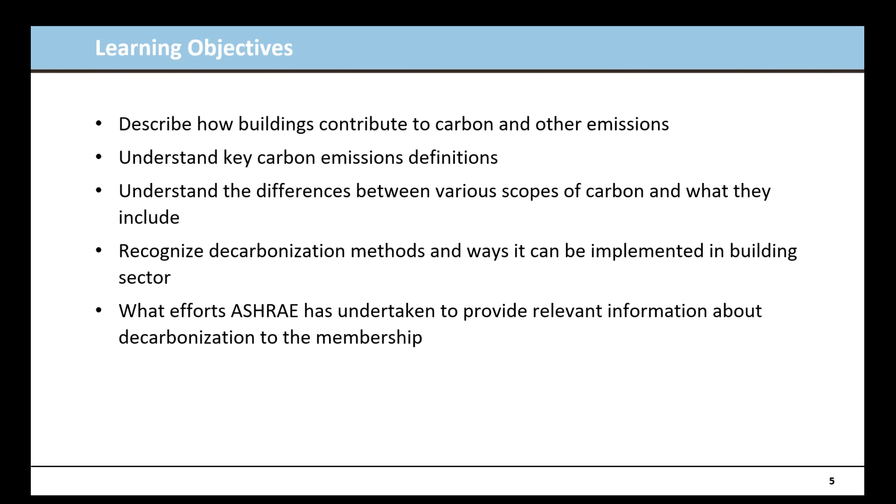So this second one is primarily on what to do specifically in HVAC systems and how we can decarbonize those systems. The third one is how do we apply it more vigorously throughout everything we're doing. I'm going to touch on some of those topics, but not spend a lot of time on them. I will say this is not primarily all my work. I put this together, but I had a lot of help from smart people working on the task force for building decarbonization, and some of these slides are directly from them.

So that's my outline. But I want to give some background starting on this. We're looking at another 2 billion people joining the planet in the next 30 years. And sometime around now to the next couple of weeks, the 8 billionth person alive will join us.

So we already have huge growth in population globally, and that's going to continue. With another 25% growth in the next 30 years, we're going to need buildings. It's estimated that by 2060 we'll need 230 billion square meters, or 2.5 trillion square feet, which is effectively like building New York City every month. That is a huge growth area.

But it's not going to happen in the traditional areas. There's a terminology of the global north and the global south - you see the global north in blue here, and the global south all in red. Most of that growth, both in population and building construction, is in the global south. So that's a large amount going on.

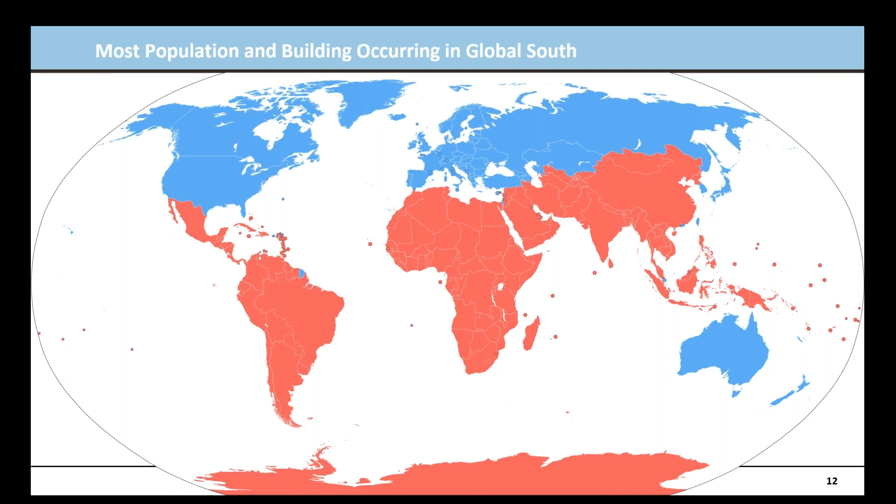A good chunk of it is going to be in Africa, particularly as economies like Nigeria, which is already Africa's largest economy, grow by 50% over the next 30-40 years. So it's a huge transition - not so much in what you may think of as the traditional parts of the world.

On the other hand, we're already seeing huge change in the climate, and that's the reason we're even considering decarbonization. It's the goal we're trying to deal with - from 2015 trying to go from 2 degrees to 1.5 degrees Celsius, but now pushing for 1.5. Unfortunately, I think we're already going above that if you look at some of the data.

I recently did a quick study, just picked 12 cities at random, and we're already seeing about a 0.5 degree change over the last 25 years in our design conditions. That's kind of disturbing, that we're already seeing this before what these models are predicting going forward. I also like to start my talks with why do we even care about buildings.

If you look worldwide, on the left you'll see about 30% of our energy use is for buildings. If you go to the far right, in the US it's even more - 40%, and growing. But if you look at the third and fourth bars, you see the contrast between a very dynamic developing economy in China, where buildings are only about 20%, and Hong Kong, where we're at 65% today. Hong Kong has very little industry related - it's all services, banking, and other business activity.

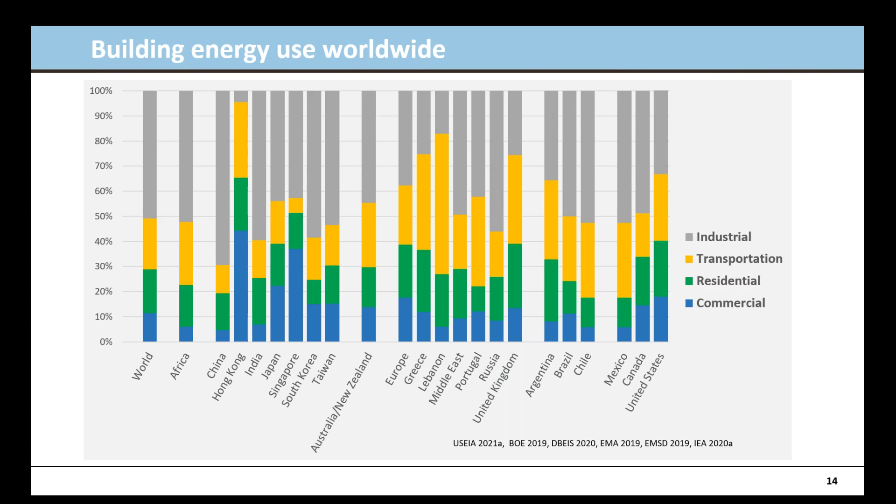So as noted, it's comparatively large, and for a developing economy like China, you're seeing it - it's already at 20%. Well, 15 years ago when I started putting these together, it was at 12%. So for economies that are growing, that global south I showed earlier, there's huge change in what they're doing moving forward. But regardless of that, buildings are a large part of it.

If we look at the US, buildings are practically over 40%, about half commercial, half residential, and industry at 33%, transportation less. Industry, if we went back to the 1960s, would have been not unlike China, well over 50%. Transportation's been growing, but I think we have good quality standards that are really pushing that.

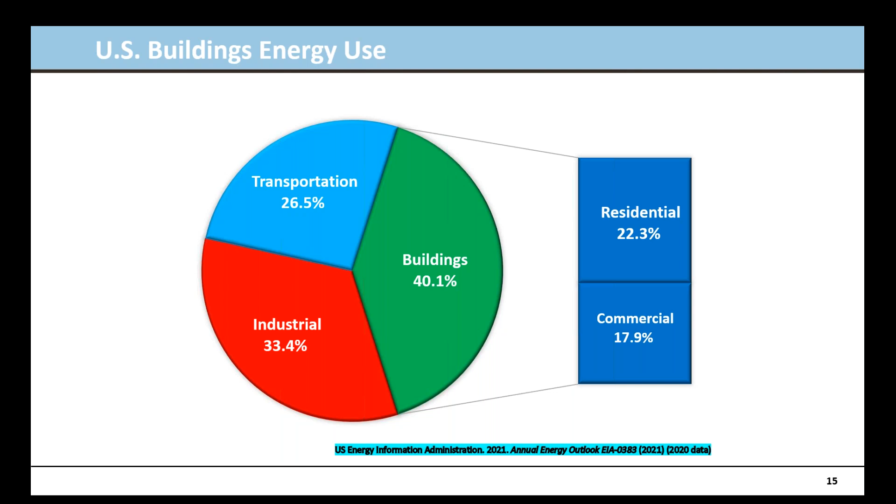Our buildings are changing, partly due to adopted technology. If we look at our houses, the top three uses are heating, water heating, cooling, and refrigeration, plus some appliances—that's not a big deal. But at the bottom we have this category called other uses: small things, lots of technologies that weren't traditionally considered. If I were there live, I'd show you my phone and all the computers and bits and pieces now driving a full quarter of our energy use that weren't there probably 30 years ago. So if we're going to deal with it, we have to deal with the whole spectrum of what's going on in our buildings, not just the top three or four, which is where we've been focusing.

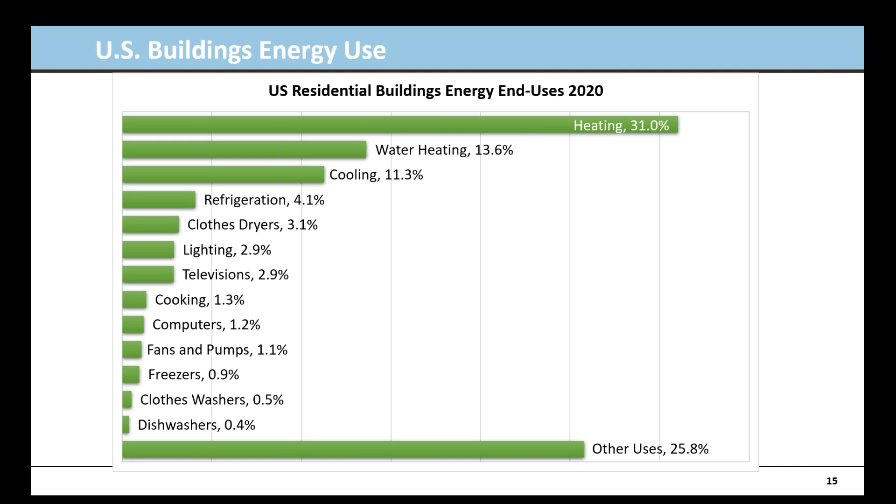In commercial buildings, that other uses category is almost a full third. But of course there's no typical commercial building. If I were a supermarket, the refrigeration category would be over 50%, with cooling and lighting second and third. So depending on the type of building we're in, it varies a lot in what we're seeing. But on the other hand, we have to deal with those other uses and be able to look at that.

So, Drew, examples of other uses—you mentioned your cell phone. Other uses could be, for example, IT infrastructure, right? Yeah, definitely. You've got computing listed—office equipment and computing, which is 13% of the total. But it is the IT infrastructure. I don't have anything about elevators and escalators in here, and in a lot of buildings that's a larger building—that's a big percentage of what's going on.

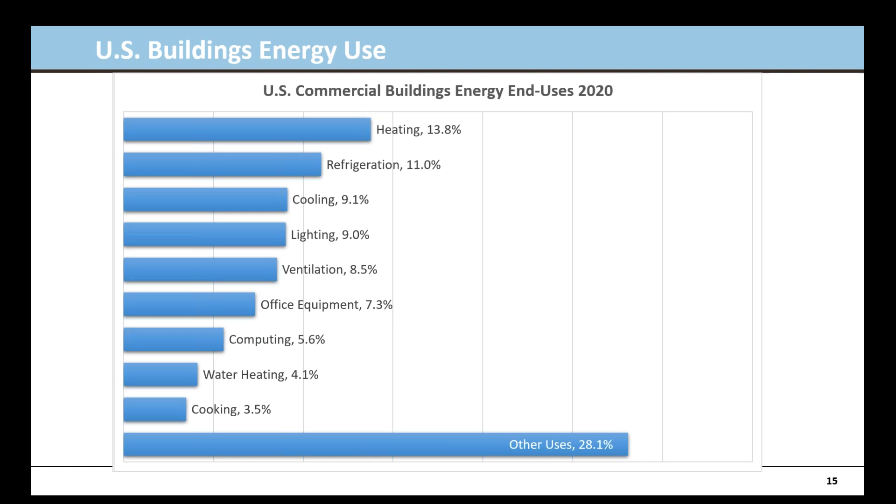If we look globally at where carbon dioxide equivalent emissions come from, buildings are responsible for a full 37%. You see transportation, other industry, and non-building construction industry making up another 10%. If you break that out between residential and non-residential, the indirect amount is related to our electricity, which is one of the biggest drivers of carbon globally. Residential buildings are responsible for 46%, or almost 20% of that total, not unlike the numbers I was just showing, with residential a bit more. But a quarter of that 37% is in construction—the materials we build and the processes we use to get our buildings built today. So it is not an insubstantial amount of energy or carbon emissions here.

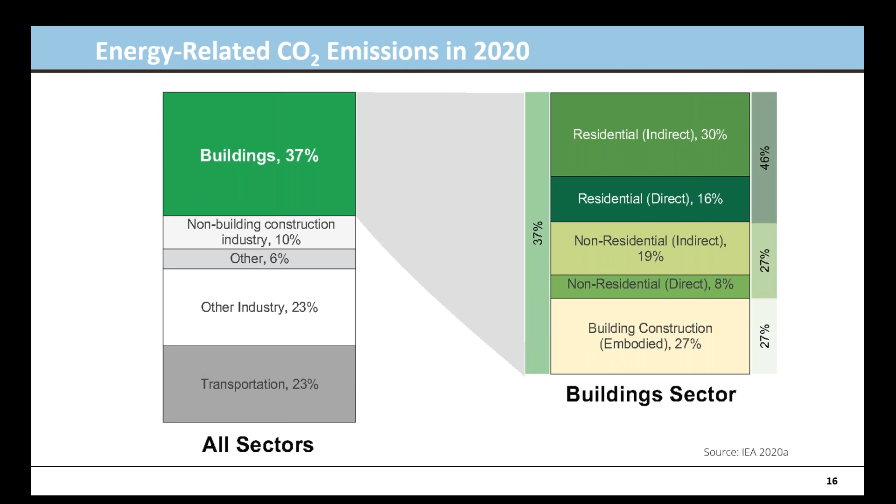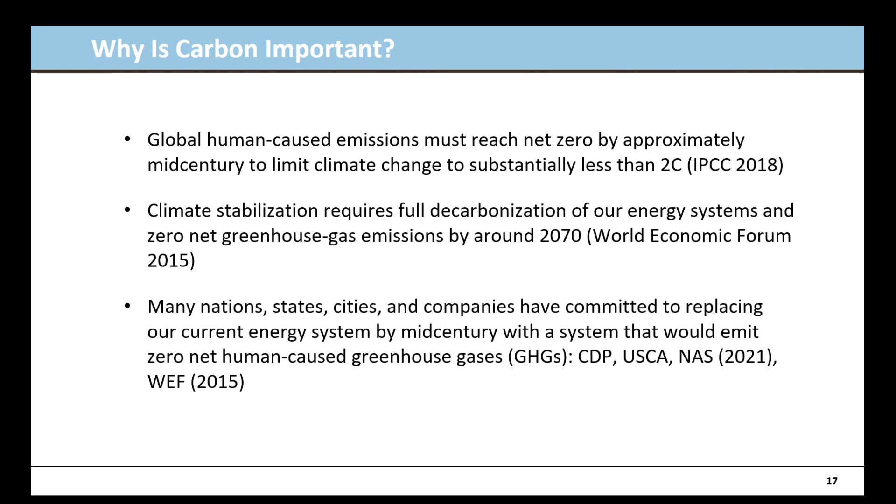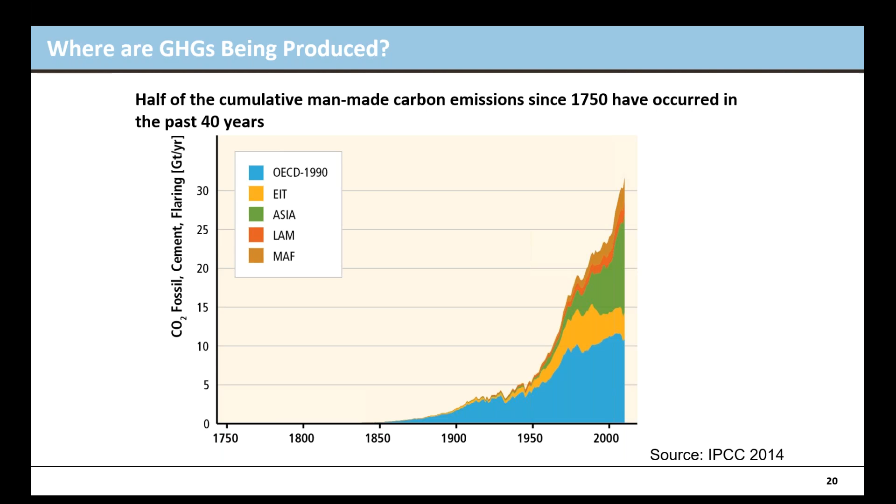So why do we even care? Our human-caused emissions have to go to zero by mid-century, by 2050, if we're going to have any chance of limiting human-caused climate change to two degrees. There's a lot of variability in what's happening, and that means decarbonization of entire systems, including our buildings—a huge amount of work we've got to do. Already, a lot of places are committing to that, not the US particularly, but trying to get to net zero carbon is a huge challenge. Historically, more than half of the cumulative emissions have occurred in the last 40 years, so everything from the 70s on has really driven that forward. The US and other developed countries have been doing it for many years, back into the 1800s or more, but with the growth in transportation and the ubiquity of cars and everything, it's really been driven on since the Second World War.

So why do we want to decarbonize? This is likely, in terms of the building sector, the most formidable challenge we're ever going to see. It's not just individual buildings, it's every building we've got to deal with. We're already at 37% of energy-related carbon emissions, and the building stock is expected to double by 2060—a huge amount of growth at the same time we have population growth. If we're designing buildings today, the decisions we make can lock in an emission level, unfortunately probably high, that will persist for decades unless we're looking at that to really drop it down.

The UN Environment Program estimates that we've got to cut direct carbon emissions by 50% and indirect emissions from power generation by about 60% by 2030. That's only 8 years away, which means we've got to be reducing our emissions by 6% a year over this decade.

And that's equivalent to what happened during the pandemic, when everybody stayed home and our buildings were underoccupied. Not that they were unoccupied, but much big change. Unfortunately, that small bump we had during the pandemic seems to be over, and we're back to where we were before.

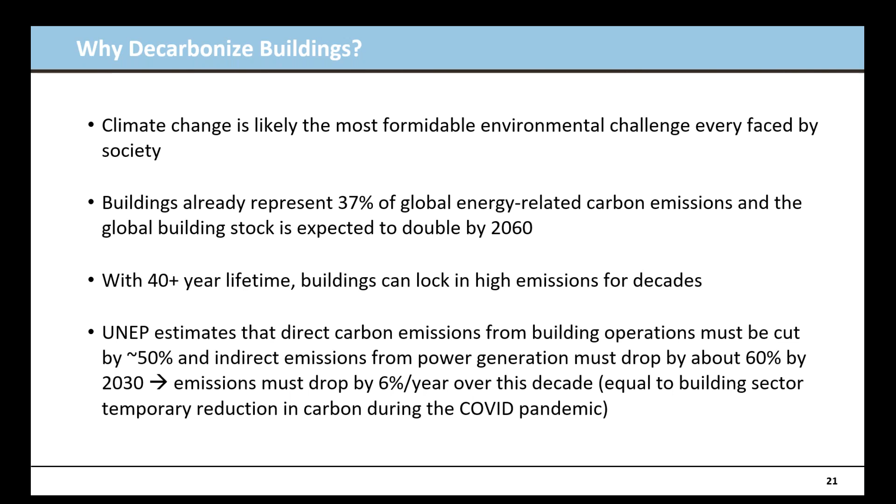But if we look at what each of the countries is committed to, this starts on the left side. You see a couple countries have already achieved that. Uruguay, Finland are going to achieve it in the next few years. Austria, Iceland by 2040, Germany and Sweden by 2045. The bulk of this is everybody saying, oh, we're going to do this by 2050. And that is going to be a challenge for whatever country is dealing with this. Many of them are trying to deal with a big change in the economy.

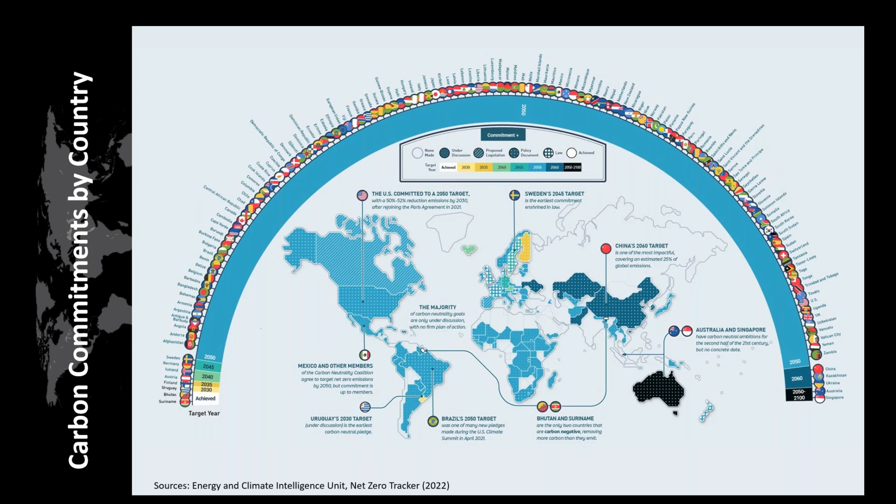And you see gaps in Africa. There's no commitment from a lot of countries that are already big contributors to this. And then you go over to the far right, and we have China and Australia and Singapore that are not even committing to doing the 2050 target. And as we saw, we've got to have that commitment to be able to move forward.

So let's talk about some basic terminology. Carbon dioxide, it is the gas that everybody talks about, but we often talk about it as a carbon dioxide equivalent. The global warming potential of carbon dioxide is 1, so everything else is converted to its global warming potential and then multiplied by that to get to a carbon dioxide equivalent. So global warming potential, again, we're just looking at any other of the greenhouse gases and how their equivalent effect is as compared to carbon dioxide.

Greenhouse gases are the ones that are trapping the heat. They can be natural - it's one of the reasons that we can exist on the planet. We do have a bit of a greenhouse here, but water, carbon dioxide, nitrous oxide, methane, ozone are the primary ones controlling that. And for the most part, we are emitting more carbon dioxide and ozone than would be naturally put in there.

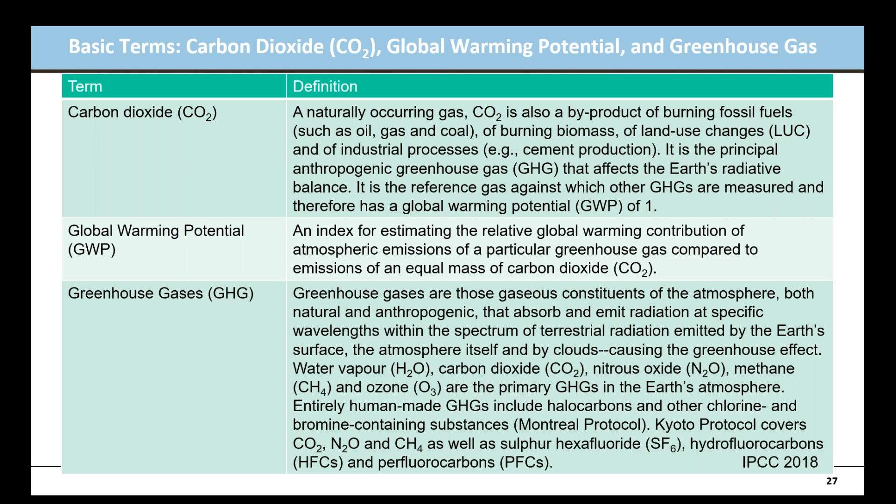But this also includes the halocarbons and other chlorine, bromine substances that are controlled under the Montreal Protocol as well. So a lot of the refrigerants we use are huge contributors to that, which is one reason they were early things that we looked at. So again, equivalent emissions is just multiplying the global warming potential of a particular greenhouse gas over its 100-year lifetime, which for many of them is quite a bit higher.

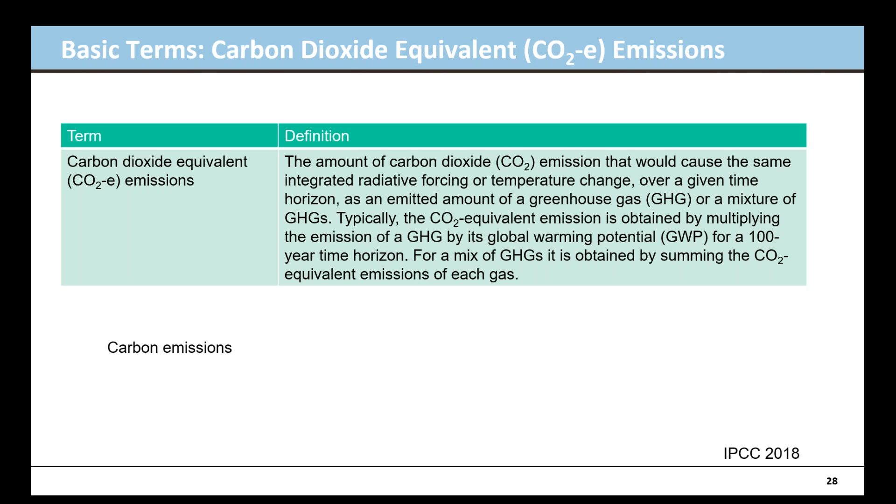And then I think probably the most important is to understand where the carbon is coming from. We have operational carbon, the carbon emissions just from operating our buildings. These may be direct - on-site combustion of fossil fuels - or indirect, which is likely the power supply.

And so the other important part of this, as we are looking to decarbonize the operation of our buildings, the embodied carbon - the embodied energy related to our buildings, the materials, how we construct our buildings - it becomes increasingly important. So that's something we have to do as well, is find materials and systems that are going to be less carbon intensive as we move forward.

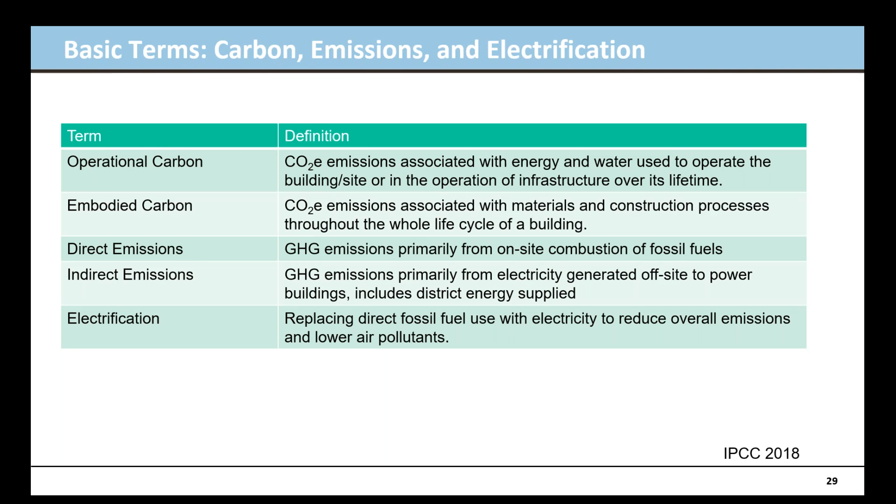Other terminology: life cycle assessment, just looking at impacts of a product, service, or building throughout its life cycle. Environmental product declaration, or EPD - these are independently verified ways of looking at the life cycle information for a particular product. That's a challenge, and as I talk about HVAC systems, unfortunately our industry has very few EPDs for equipment or systems today.

There are other things like carbon capture, utilization, and storage, where we try to capture emissions before they get into the atmosphere. Other site carbon sequestration, and finally building performance standards, which we are beginning to see get traction. Boston, New York, Washington here on the East Coast all have set up standards that require our existing buildings get better over time. So that doesn't mean it's just a one shot energy performance standard. This is over the life of the building, and as we move forward, our buildings have to move to zero. In Boston, that's by the mid 2030s - every building in Boston is supposed to be a net zero carbon building, which is a huge challenge as we're moving forward.

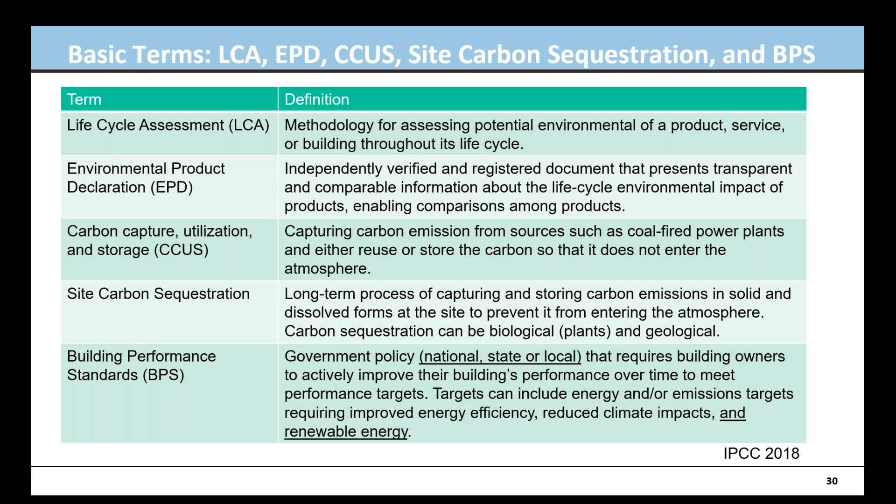So let's talk a little bit about carbon in buildings and how it relates. This is from a European standard talking about all the bits and pieces. The blue is the use stage, but that includes building operation, maintenance, repair, replacement, refurbishment, the operational energy and water related to that. But that's not all that's going on.

There's also the other stages of life, from the product stage, where we're trying to get the materials, transport them, manufacture and bring them to the site, install them, as well as in the end of life stage, how are we deconstructing, demolishing, and how are we reusing materials or waste?

Well, the focus of a lot of this work is in B1 to 7, that use stage, but there's a huge amount of embodied carbon related to that, and we need to take that into account as we're working forward. And if you look down at the bottom, you'll see scope 1 and 2, which is the operational carbon, and that's what a lot of people talk about. But the rest of it is all scope 3. That's the carbon that's already in the product, in the systems that we're designing, that we've installed, that we really need to deal with.

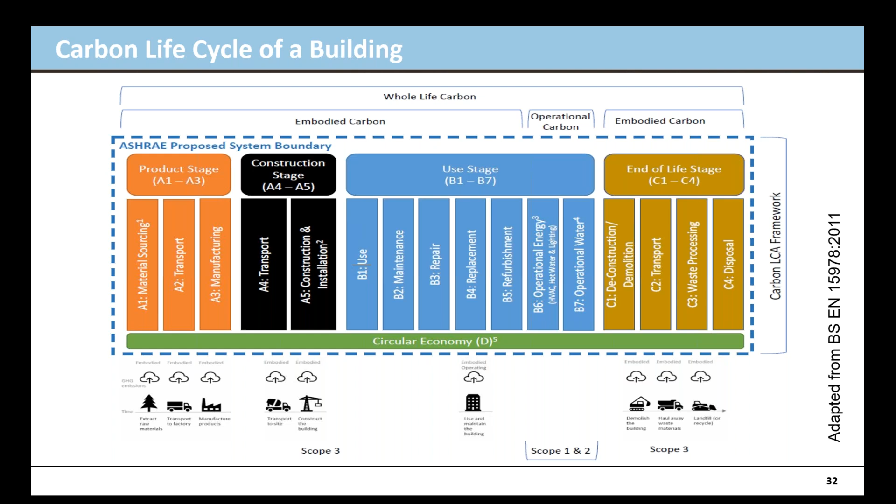So what do we mean by building decarbonization? Essentially, we want to reduce or eliminate the man-made side of carbon emissions related to building, and doing that throughout its life cycle, not just the operational side, but also the construction side.

As far as how people look at it, the 4 pillars for decarbonization begin by reducing the emissions in our materials and systems that we select. Energy efficiency is still very important. Making our buildings as efficient as we can means we're reducing carbon. And then beyond that, using cleaner energy sources, and we'll talk a little bit more about that in a bit.

And then finally, shifting to electricity. With buildings responsible for about 72% of our electricity use in the US, buildings consume most of that power generation. And if it's not clean, we're not moving forward.

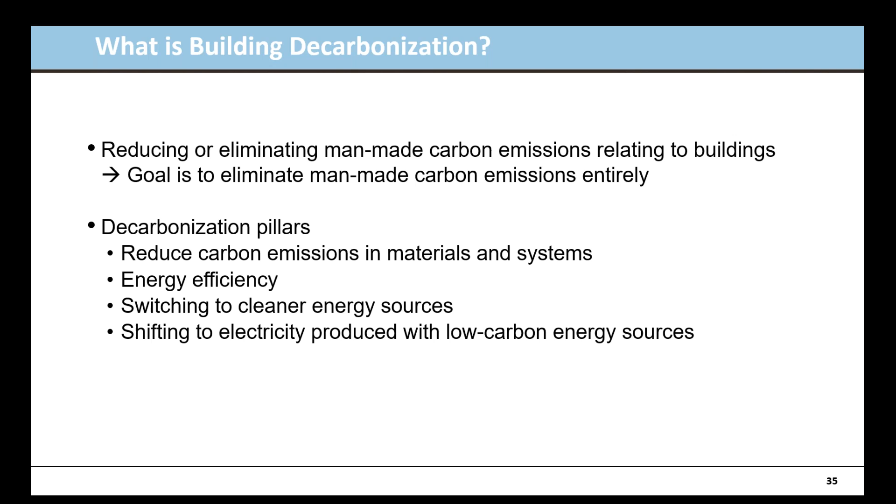Drew, did you say 72%? Just then, yeah, 72% of electricity is used in our buildings. It's incredible. Yeah, there's 30 some percent that's industry, and then a small percentage for transportation, but our buildings use the bulk of electricity. Incredible.

So some of the basics, and this is derived from ASHRAE, which published this past summer a position document on building decarbonization. I'll talk a little bit more about things that position document brings up.

We have to continue providing the environments that people want to be in. They've got to be healthy. They have to enhance productivity and be places that people want to be. We already know that we can design, build, and operate buildings that either minimize or eliminate carbon emissions, and that's possible today. There's a growing number of buildings, unfortunately not a huge percentage yet, that are already operating at zero energy, but pushing that on to zero carbon is kind of the next challenge.

Our HVAC systems have both direct and indirect emissions. The electricity is the indirect side of it, but fossil fuel fired equipment is the direct side. So we have to work on both sides of that.

Energy continues to be the mainstay here, but we also have refrigerants, and our refrigerants, depending on how good the systems are and how well they're maintained, can leak a huge amount, and refrigerants have a global warming potential way higher than that of carbon itself. Again, we have to look at embodied carbon and understand where that's coming from, and understand where the emissions are and where they're occurring, and how we can do that.

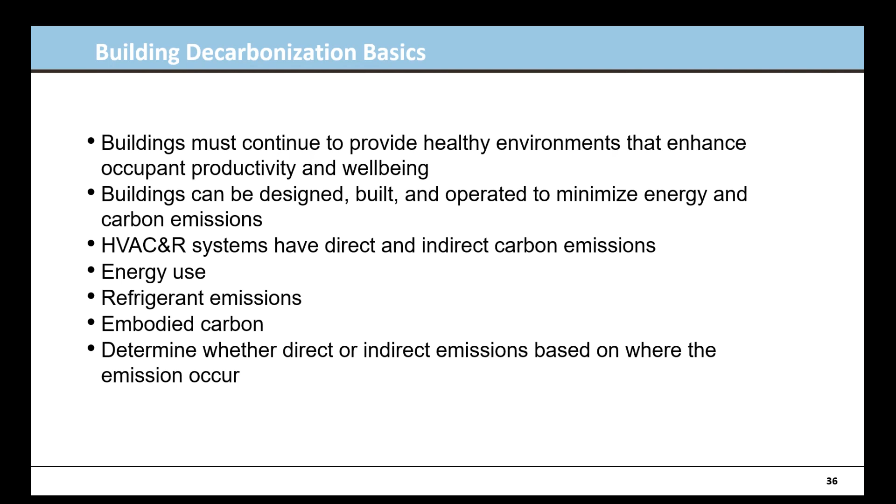The International Energy Agency says that it's possible to decarbonize our buildings. If you start with 2020, by 2030 we're going to see about a 30% growth in new buildings, so a big increase. But if we start looking at mitigating that, we could deal with most of that growth and more, reducing it by half by 2030. But as we move from 2030 to 2050, we're going to see a doubling effectively of carbon emissions in buildings. At the same time, we have the technology today to take that almost to zero by 2050. So there's a lot we can do, but we need to be doing it now.

So Drew, this leads to a question related to energy coming up in the question panel: if we move to electrification, which is the argument you're making for the right reasons, away from fossil fuel to electrification, it sort of makes the implied assumption that electrification will be non-fossil as well. One of the questions is, can renewables meet that challenge? And what about nuclear? Can you speak to those? Yeah, those are great questions.

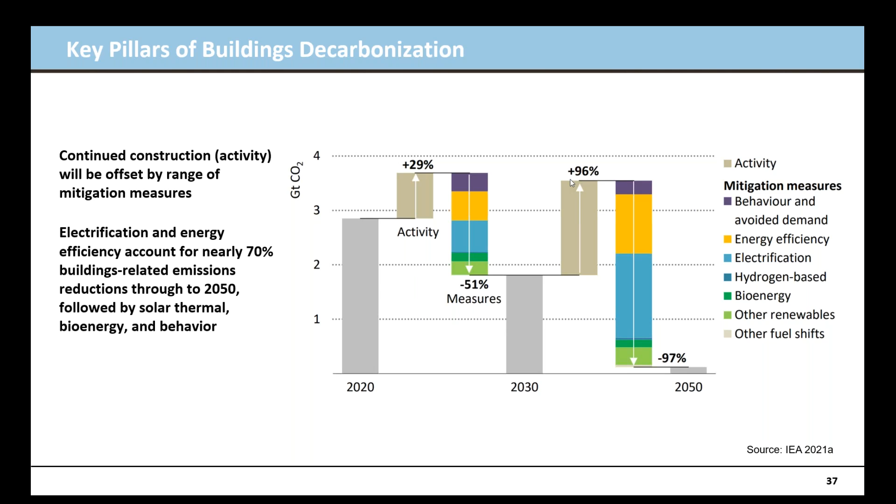So some of the principles here - we talked about pillars - reuse our existing buildings. Try not to waste that carbon we've already captured in our systems and buildings, and keep that on site. Many of the passive things we're talking about also involve making sure our buildings are oriented well, with the geometry done to take advantage of solar potential and whatever opportunities there are.

Minimizing the embodied carbon in new construction materials - a lot of people are pushing for wood products today to be able to do that. But even in wood construction, we have an immense amount of material waste that goes in the dumpster and is basically put in the landfill.

Look at electrifying space and water heating and cooking where possible. Hot water heat pumps are out there - they're a little more expensive, but long term they perform a lot better, with quite a bit higher efficiency. Going with all-electric cooking is also being pushed, particularly induction systems, which seem to be gaining some traction in the market.

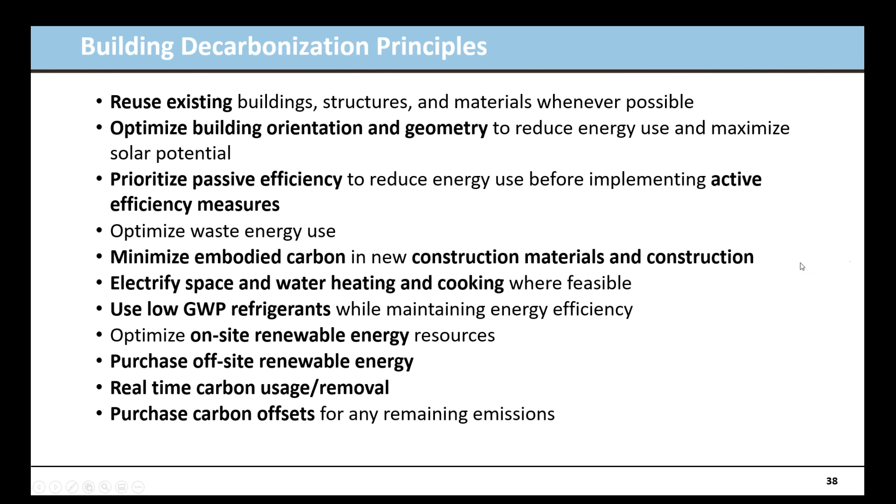Some of the issues related to decarbonization - if it were easy, we would have already done it. Buildings are custom; that's one of the challenges we have. There are a few building types, like franchise restaurants, that have a set footprint, but even those vary somewhat building to building. We build custom on almost every building we do. There's some variation in the housing market too, but for the most part there's not an easy solution that's going to work for every building.

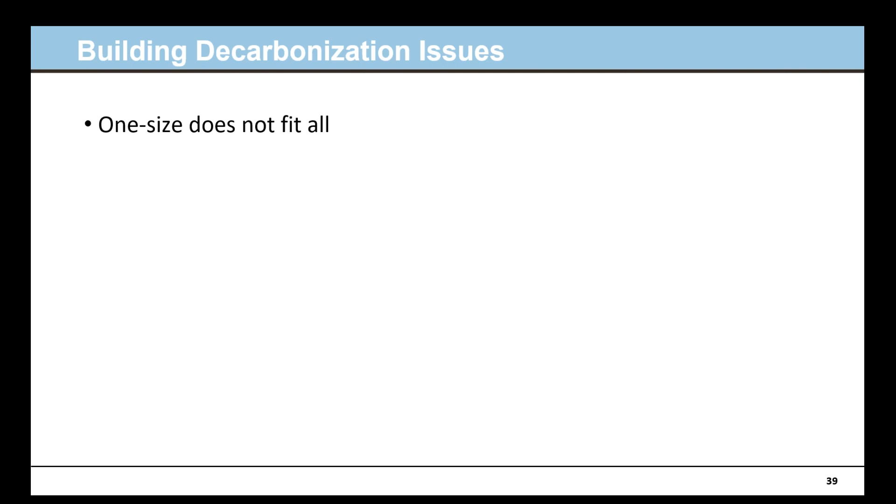We have residential, commercial, and industrial buildings. A lot of the buildings we're going to be dealing with are already here, so we have to deal with that existing building stock. In some places that's only 60%, but here in North America and Europe it's more like 80% that are already here.

We're dealing with the existing generation electric fuel mix. Even if I electrify my building, how clean is that to begin with? And the reality is not many are very clean. Here where I live in Washington D.C., we had one of the dirtiest power plants - it was actually across the river in Virginia, but it was supplying us. They took that offline 15 years ago, and it made our carbon emissions related to electricity drop by half just because of how bad it was. But it's not just buildings getting better - the electric grid's got to get better at the same time.

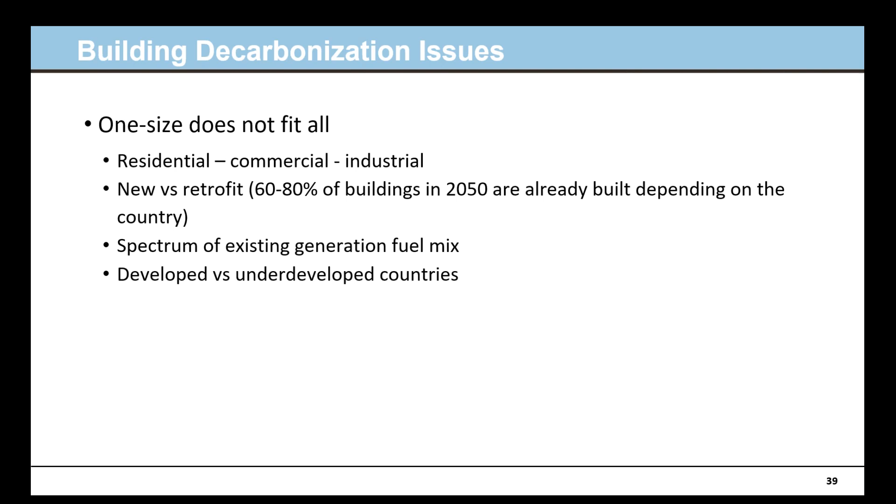Developed versus underdeveloped, we talked about that a bit more earlier. At the same time, we have codes and standards particularly related to buildings, but for many places - you see in the central US - there are not mandatory codes for the state. That's true up into Canada as well. In many respects there are standards for major cities in those particular places. But if you look at South America, Africa, and South Asia, there are many places that don't even have a beginning point for looking at energy efficiency standards.

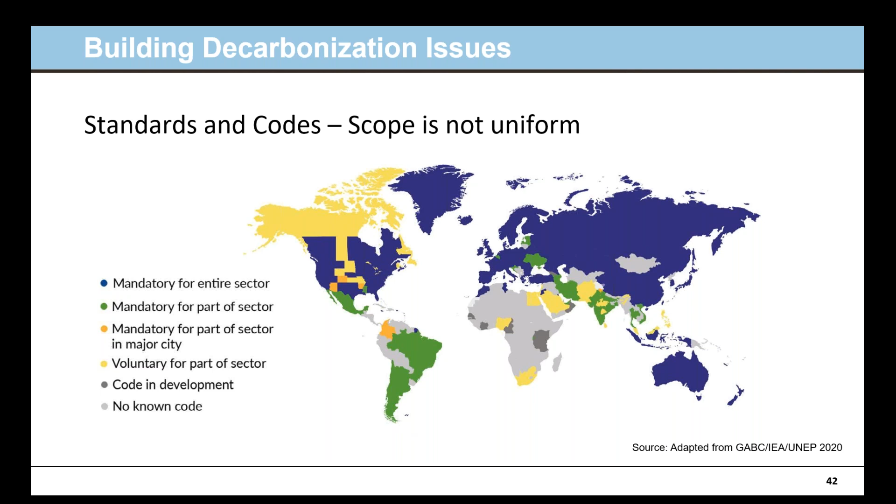Another big issue is what metric are we going to use? For many years ASHRAE has focused on energy use as the metric for dealing with energy efficiency in our 90.1, 90.2 standards for commercial and residential buildings. That's evolving, and there's a push within the society that what we're going to be measuring, accounting for, and pushing toward is carbon, and that's already changing within those standards. But then even looking at carbon, what do we mean by that? Is it average, hourly, historical, forward-looking? Is it based on cost? There are lots of different ways of dealing with that.

And then, can I buy my way out of the problem? Can I buy an offset? In guides from the U.S. Environmental Protection Agency, SBTi, and World Resources Institute, you can do that, but in ASHRAE Standard 228, which is still under development, it's not allowed. So for that standard, it's supposed to be absolute, not trying to buy your way out of it. Do we have a common measurement scale? What are our benchmarks for that? Many of our standards today just include the thermal side of things, and there's a lot in what's called Standard 90.1, for example, on unregulated loads - we don't regulate the amount of power people bring in for plugs or other processes. Those are considered out of the standard, and we need to include that if we're going to truly address this. Embodied carbon and life cycle analysis are big challenges pushed by the green building rating systems we've seen globally - it's an important part of making sure we have it all covered.

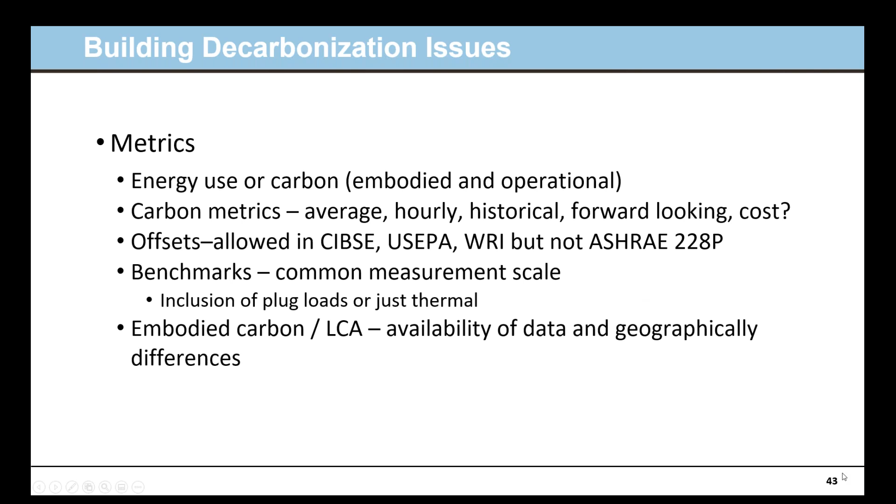or are you talking about refrigeration in the vehicles that are being transported? What does transport refer to? In that case, it's like refrigerated trucks. Yeah, that's what I was thinking. And is that because they fail and leak, could be due to vibration, things like that? Is that what's causing that?

That's a big part of it. It's not like our residential heat pumps that are basically standalone and don't have anything working on the joints and causing it to leak. A mobile refrigeration unit is subject to a lot of stress. Yes, so that makes sense.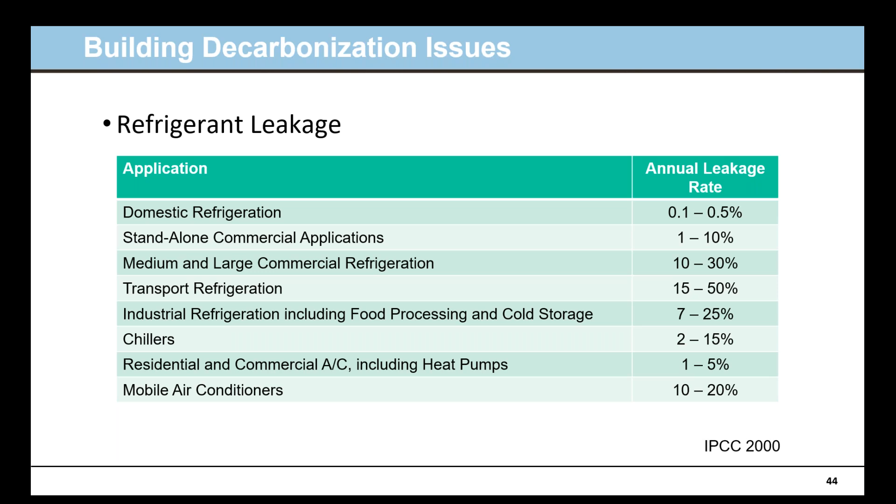Other issues: timing of the energy use. The sources and the emissions are time dependent. It'd be great to say renewables were available 24/7, but they're not - wind doesn't blow all the time, sun's not up all the time. So we are going to have to deal with that second topic, storage. How are we going to be able to manage that? There are large steps forward in that.

One of the states in Australia, their utility has recently brought online, I think it's 250 megawatt battery packs from one of the large car manufacturers. It's been such a success that they're looking to double or triple that amount, because it means they have instantaneous power available when they need it, and they can charge them when they have an excess of power.

Thermal, of course, always a good resource for us, but that tends to still be at a building scale, maybe a small community scale. How do we deal with cold climates? Heat pumps for many years, once you got below about freezing, were effectively an electric resistance heater. That's no longer true - you can see efficiency going down, but there's still some efficiency down toward 17 degrees, though that's for a lot of Northern Europe and North America. We need things that operate much better at temperatures substantially below freezing.

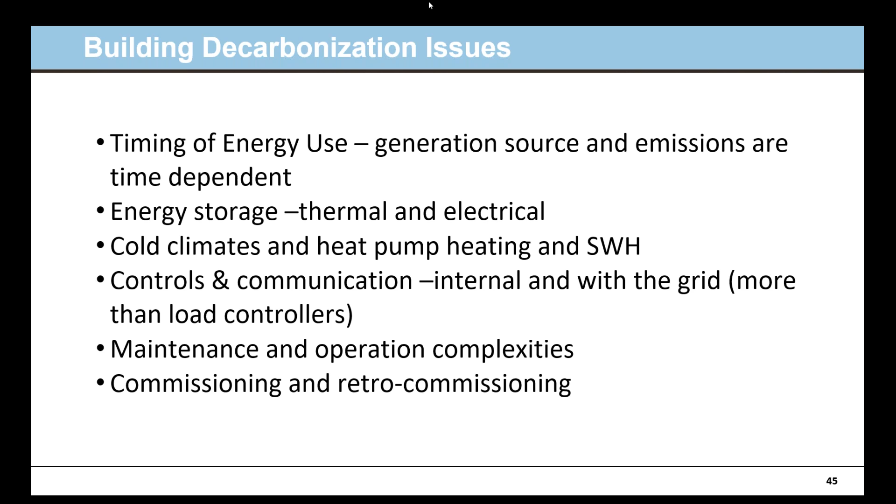Okay, I got to move on, I'm behind. So if we're going to go to net zero emissions by 2050, there are things that we have to do. We have to have standards that are already reflecting that, the building performance standards I've mentioned for Boston, New York, and other places, the tools and the training all have to be part of that. But we have to, at the same time, electrify, and energy efficiency has to be looking at grid-friendly approaches, so we have storage and grid responsiveness, both in our buildings but also at the utility level. And then finally, zero carbon energy, having that available. Our buildings can't go to zero unless the grid is zero as well.

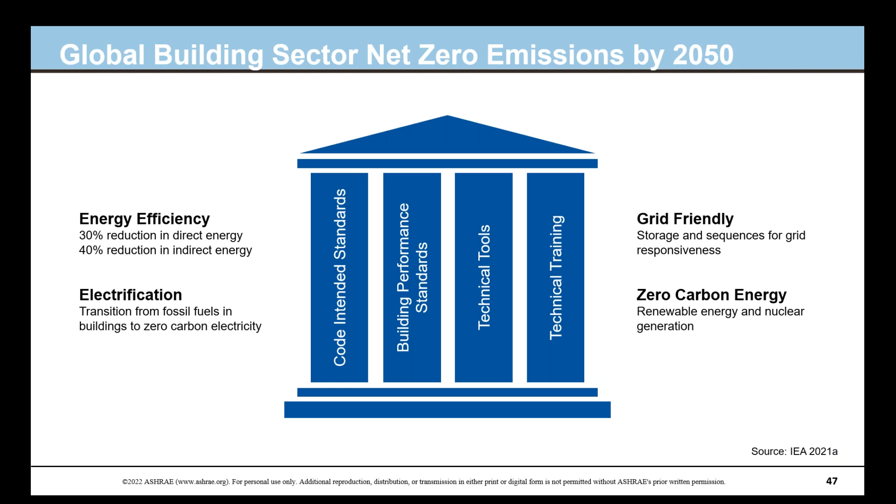So this is the building performance standard in Boston. Over the next year, or the next 30 years, depending on building type, you've got to take your buildings to zero carbon per square foot. So for example, office buildings, by 2034 have to be about 50% better, and by 2044 we're already at 75% better. So by the time we get to 2050, truly zero. And this is part of the regulations now in Boston.

Now these are referring mostly to bigger buildings. A lot of these standards don't go below about 10,000 square feet, just because of the onerousness of dealing with that. So these are dealing with mostly commercial at this point, and with half of our building stock still residential, it's going to be a challenge to move there. It does include multifamily housing, but that's not going to cover all the single family housing that's out there.

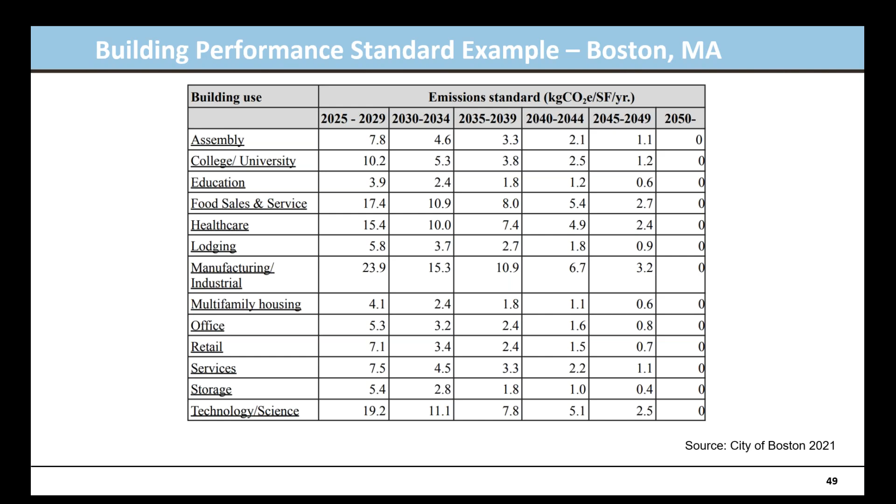If you look at wind and solar power globally, it's about one tenth of the global electricity already, and that's pretty amazing what's happened there. But it's the fourth largest source of electricity beyond coal, gas, and hydro, and growing. Globally, 80% of new electricity plants that went in are renewable. So that's a huge change there. But if you look at the U.S., it's about 13%, which is a big increase.

Less so in Canada, Mexico, Nicaragua doing better than the U.S. for grid solar. If we look at South America, 13% for Brazil, 21% for Chile. Brazil has always seen themselves as very much a green power because their baseline is a lot of hydro, but anything new they've been building these days has had to be fossil fuel generated. We look at Africa, not much penetration there. Kenya is doing well at 17%, and Morocco, Mauritania up over 10%, but huge parts of the continent, you look at Nigeria, they're only 0.1%, and that's the largest economy in Africa still, and is expected to continue to be.

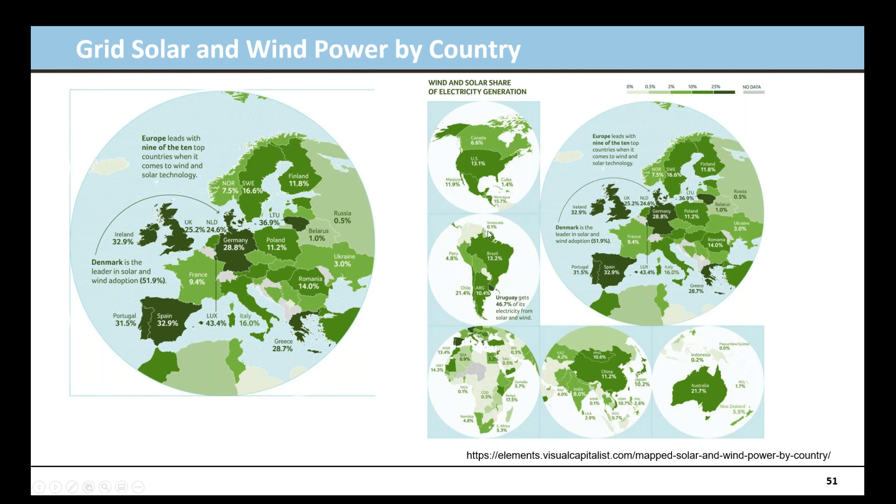Europe is doing quite well: UK at 25%, Germany at 28%, Denmark at 51%. Occasionally you'll see a news item that the UK ran completely on solar today, or Germany was 100% renewables for a day. That's beginning to happen, but it doesn't happen all year yet, and that's a challenge. But we are seeing big opportunities there.

There are ways to get rid of the carbon once we've emitted it. We can try to restore it back into the ocean - actually the ocean is one of the largest places where carbon dioxide gets dissolved into seawater and precipitates out. We can try to put it back into mines, or even capture it at the power station itself rather than letting it get emitted.

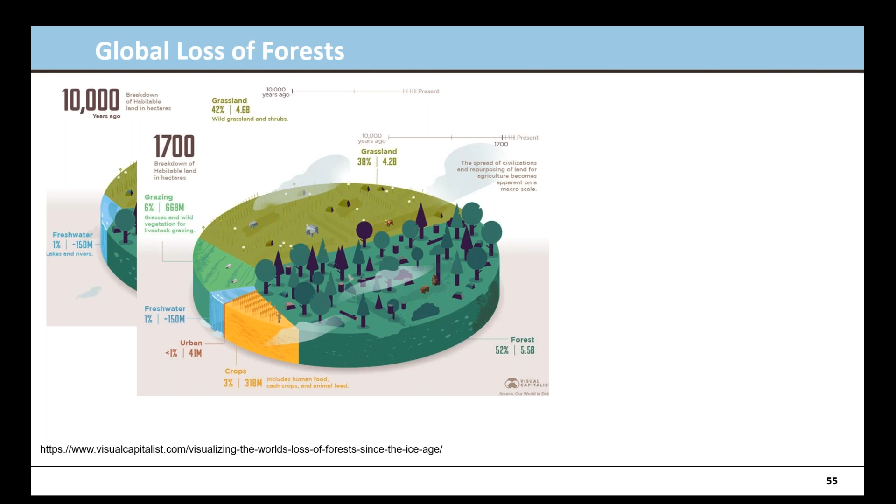One of the biggest sources of carbon storage is forests. 10,000 years ago, about 57% of land area was forest. By 1700, that had dropped to 52%, with crops, grassland, and some urbanization coming in. By the 1950s, that 52% had dropped to 44%, and the grazing area had grown from 6% to 31%. So now for food production and crops, almost half our land area is covered.

By 2018, we're now looking at truly 50% for grazing and crops, and the forest has dropped to 38%. As a resource for storing carbon, that's really an important part of what we're able to do.

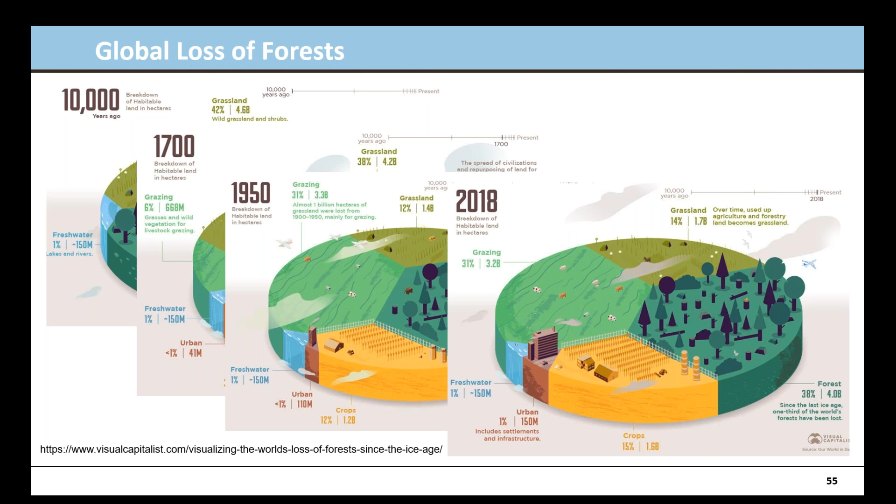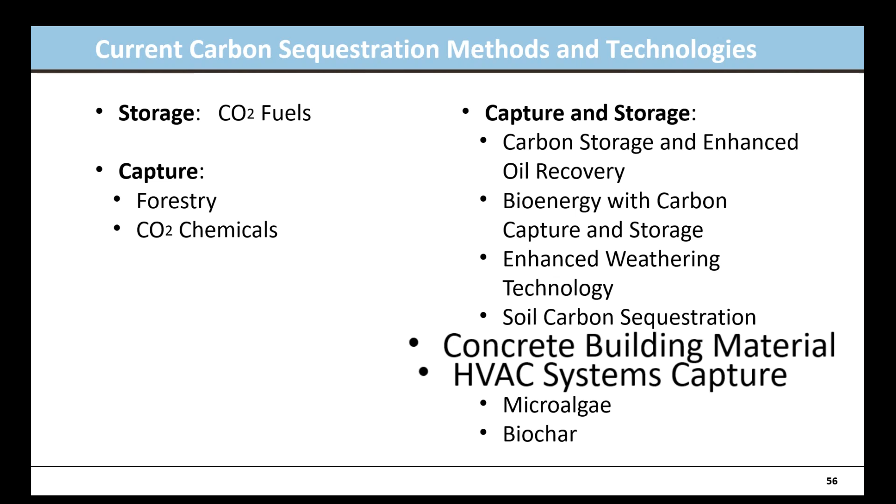There are different ways of dealing with sequestration: we can store it, use CO2 as a fuel, capture it through reforestation, or use it in other chemicals. For buildings, it really comes down to whether we can do something with our concrete and our HVAC systems, because concrete is one of the more energy and carbon intensive materials we use in buildings.

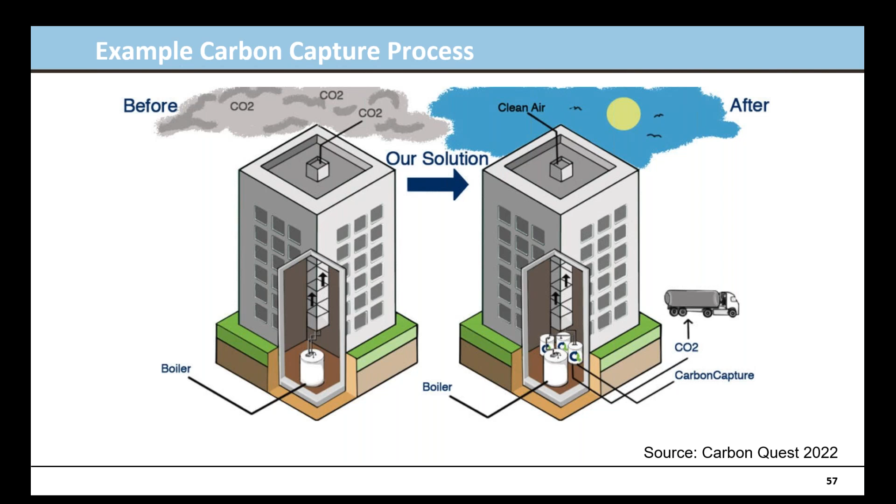I mentioned whole building life cycle analysis earlier - it's really just a way of quantifying the environmental impacts of buildings and processes. It's the best way to look at any carbon emissions for any building project.

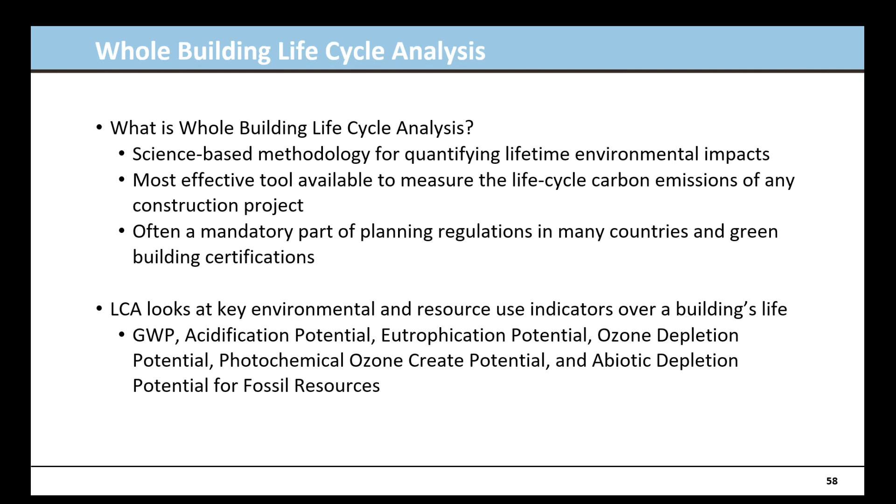We're already seeing LCA show up as an opportunity in many green building rating systems, used as an alternate to the accounting many projects do today to get points. It looks specifically at global warming potential, acidification, eutrophication, ozone depletion, photochemical ozone creation, abiotic depletion, and fossil resources - the whole spectrum of environmental impact, quantified for the building.

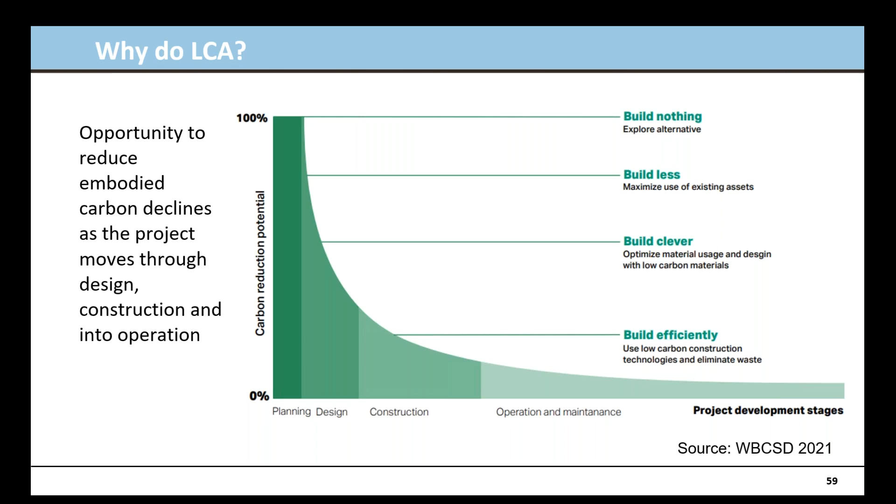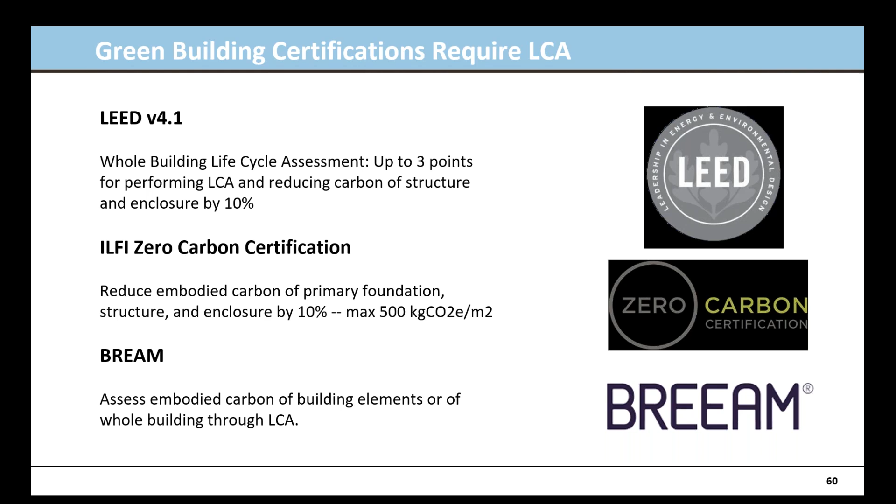LEED gives you up to 3 points for doing an LCA and reducing the carbon of the structure and enclosure. Living Building Challenge and ILFI zero carbon certification have a similar approach, reducing the embodied carbon of the key structural parts of the building. BREEAM has very similar provisions.

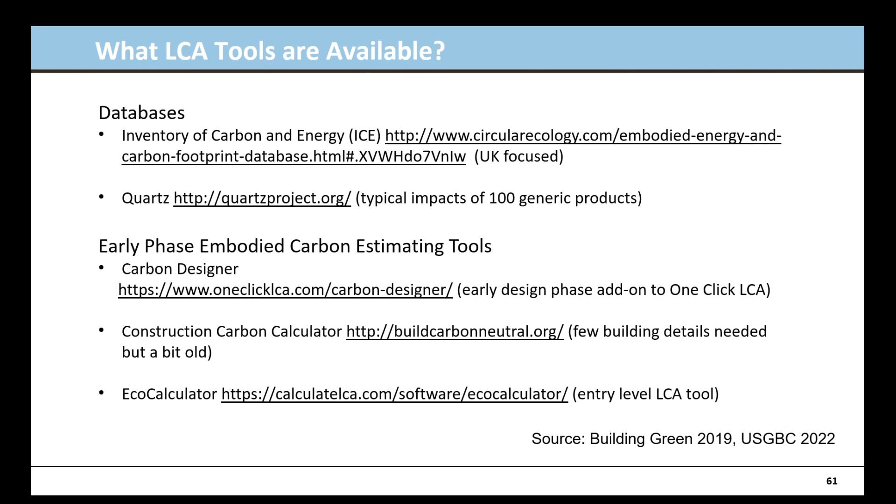There are tools available. There's the ICE, which is UK, and Quartz, which has got 100 generic products, so they're not going to be very specific to a company. Carbon Designer is one of the early design tools you can use, and a product called One Click LCA, which I'm seeing embedded or linked to in a lot of the BIM tools today. Construction Carbon Calculator is kind of generic, so you give some information and it'll give you decent - I'll say decent, not detailed - results. Eco Calculator is another early tool like that.

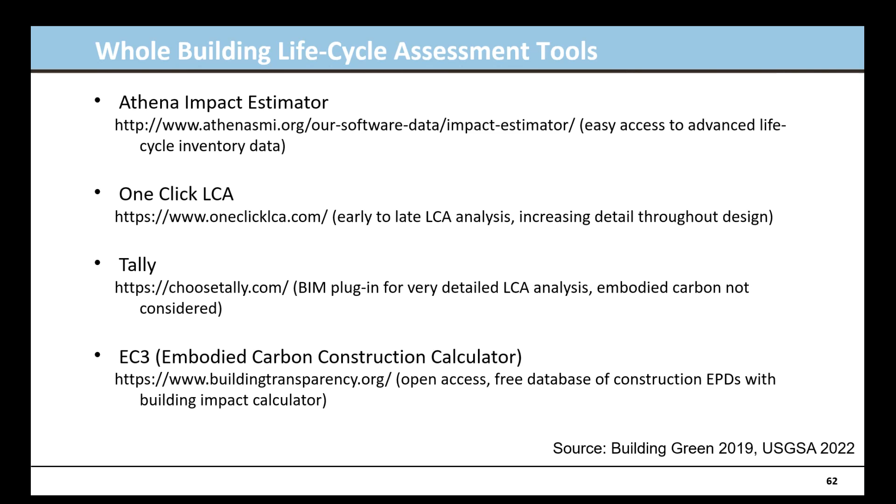Other tools: Athena Impact Estimator - Athena being a group out of Canada - has been developing life cycle inventory data for Canada and the US. One Click LCA, which I mentioned, has the ability to increase detail to look at. Tally is another BIM tool, and the embodied carbon construction calculator as well. That's interesting because it gives you access to construction EPDs, which we mentioned briefly.

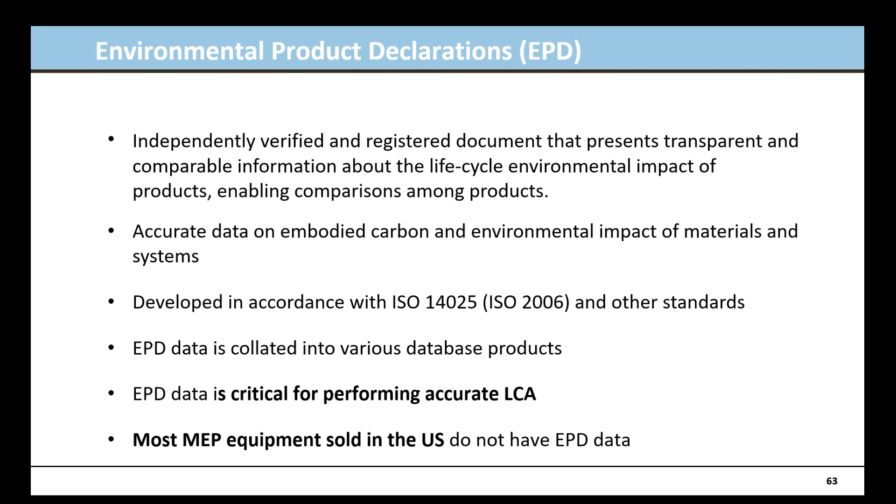Talking about EPDs, this is kind of an easy way - if I know what the impacts are of a particular material or product and have a verified way of looking at that, I can definitely get more, and put these LCAs together better. But there are standards related to that. These databases are trying to pull all that information together, but unfortunately, most of the equipment we put in our buildings, our MEP equipment, doesn't have an EPD. There's not the data available. There are many sources for the materials, so it's difficult to get some of that information.

Let's see, yeah, I'm running long. Sorry, guys. It's okay, Drew - you don't have a flight to catch, so it's all right. No, I don't, but other people may need to go to work.

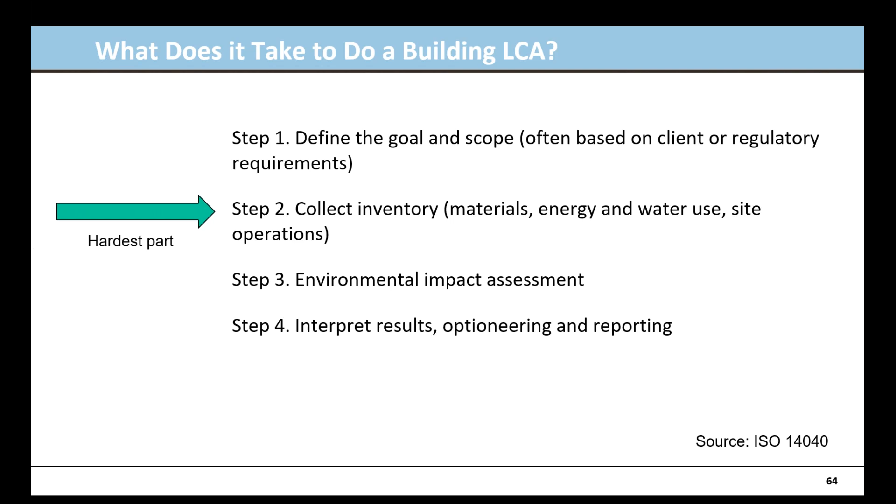I understand. But to do LCA, we need to know what we're trying to do: collect the inventory of information, do the assessment, interpret the results. Unfortunately, collecting the information is the hardest part, and where we have missing data today. So that still is a challenge.

From the building side, we're looking at fossil fuel powered equipment that we're putting in today, and what can we do: lower GWP refrigerants, green fuels including hydrogen as a possibility, renewable gas, methane recovery, biofuels, cooking oil. Those still do emit, but they're not adding to the problem that was already there. Heat pumps - and unfortunately what you're hearing, the mantra for a lot of the industry right now is heat pumps, heat pumps, heat pumps. I think heat pumps are an important part of it, but there are other things we can do there.

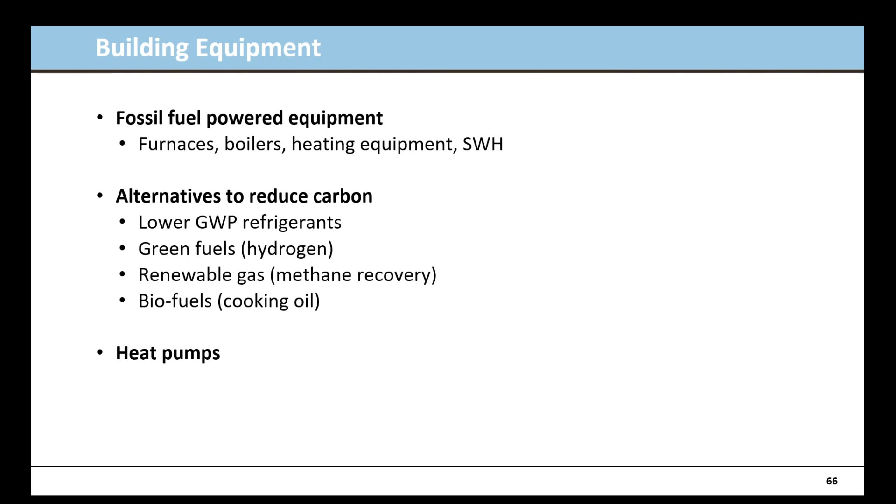As far as lower GWP refrigerants, we see the global warming potential from R410A is 2,088 times the amount of GWP as carbon dioxide. If we move away from those toward lower global warming potentials, you see the HFOs and R514A - we're also seeing kind of a safety issue.

The traditional refrigerants we've been using have been pretty safe - you don't have to worry about flammability or other things. As we move towards some of these others, the B1 category can definitely be dangerous, and the exposure limits are much lower. So if we have a leak, it can be dangerous for people to be in the space.

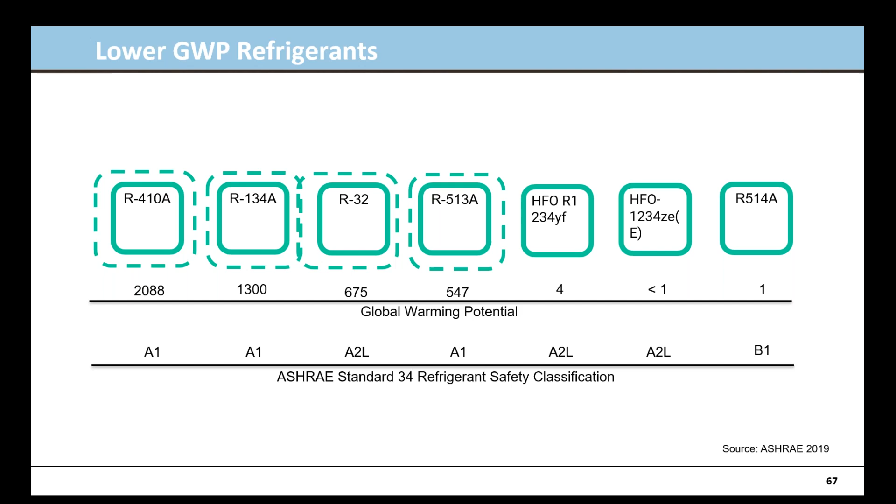I feel silly talking about heat pumps to an ASHRAE audience, but there are a lot of different types. We probably think of heat pumps as the traditional one in our homes, but there are different sources: air, water, ground, solar, or even industrial scale. Today we're seeing everything from residential appliances to industrial scale heat pumps. That technology is pretty straightforward - it can be easily done.

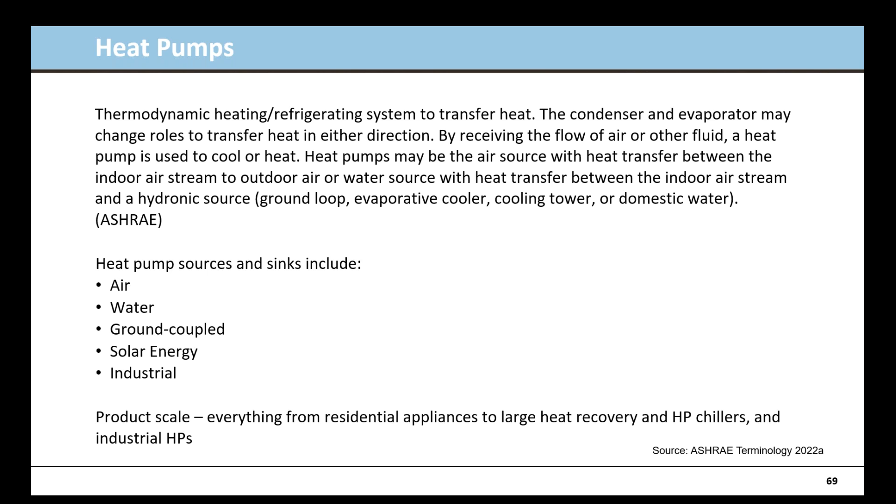So the traditional kind we see in our buildings today, but also things like a heat pump water heater - instead of electric resistance, we can get an efficiency 2, 3, 4 times what we could with electric resistance. And one that my wife and I are about to try is a heat pump dryer, which effectively has no vent, so it's ventless. You don't have to worry about hot air or hot moist air coming out - what comes out is just water that goes down the drain. They're just using the heat pump to dry out the clothes.

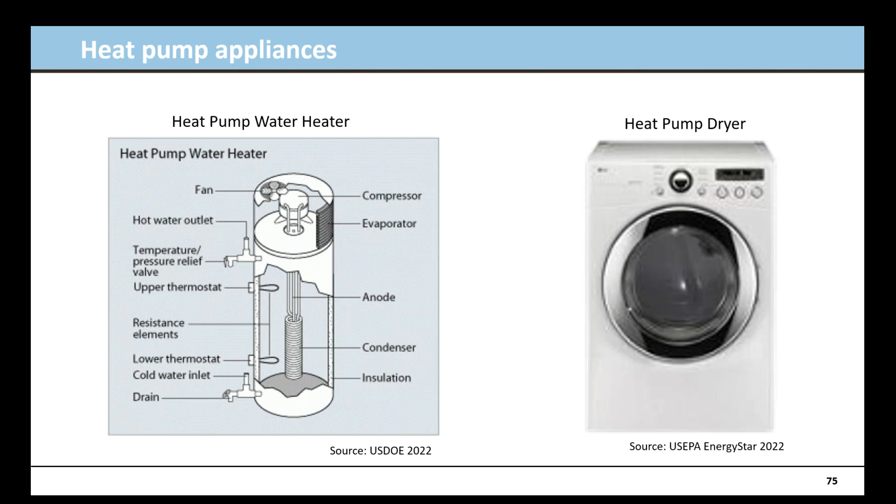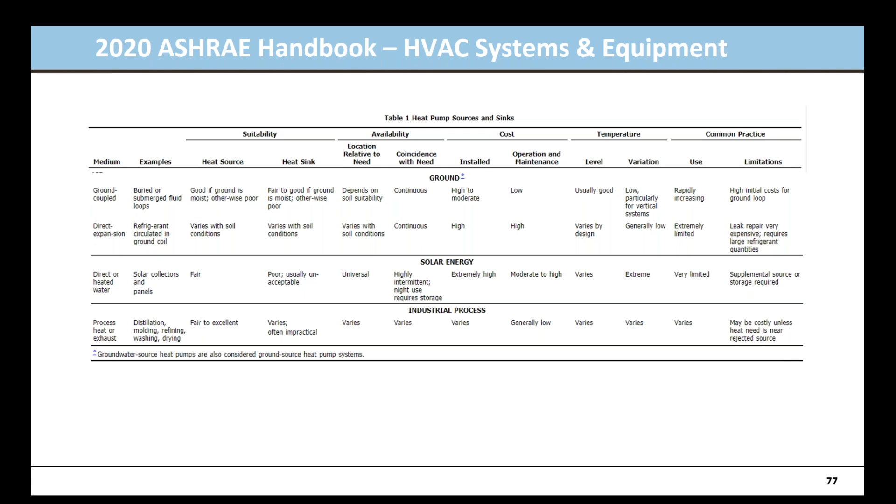The 2020 handbook has a great comparison of the different HVAC systems, particularly the heat pumps, and their sources, heat sinks, costs, temperature, and where they're typically used. So it's a great table here related to that.

As the grid is transitioning to renewables and clean fuels - we talked about renewables earlier, but we're essentially talking utility scale.

I worked 30 years ago at an electric utility in California, and even at that point, wind and solar were the cheapest new generation capability they had. Today, the price is a tenth of what it was. So for them, it's kind of a win-win, because they're getting cheaper installation, but at the same time they have to deal with storage, and how are we going to deal with time of use versus availability.

Lots of people have been dealing with that for many years - pumped hydroelectric and other systems there. Renewable hydrogen, hydrogen-infused natural gas, biogases - trying to recover some of those and use them before they're offset. Methane's a very potent greenhouse gas, so if we can capture it and use it before it gets into the atmosphere, we're better off.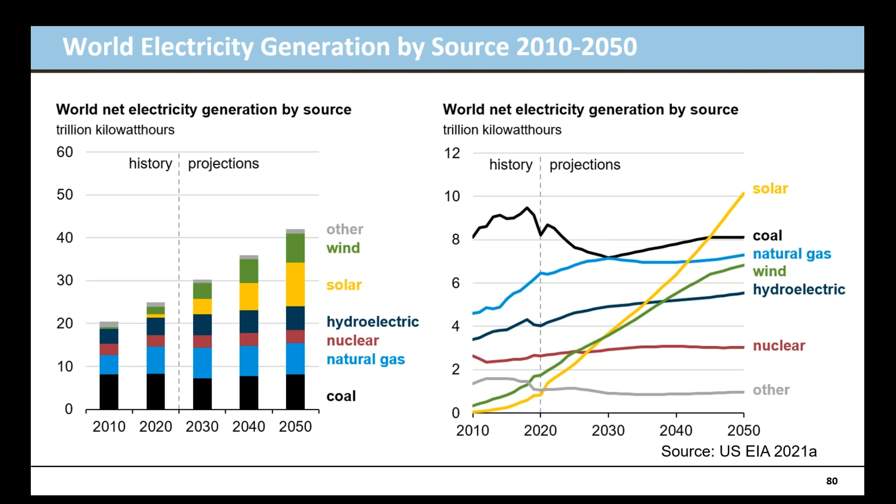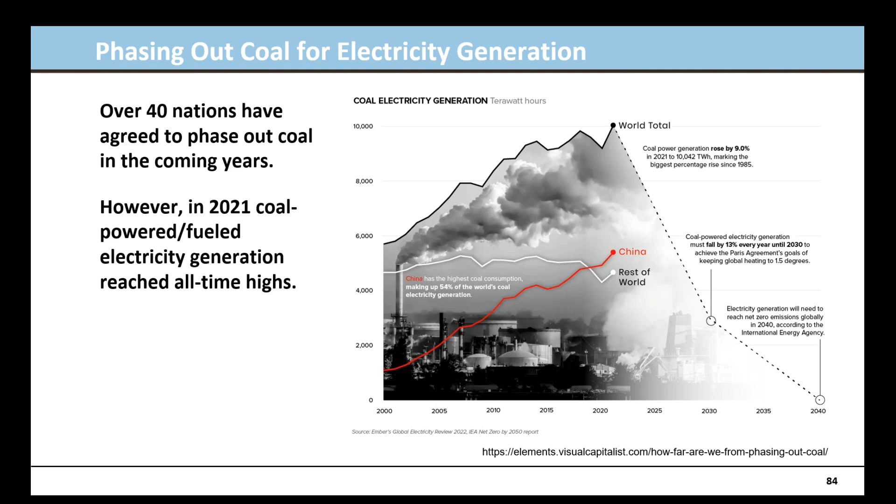Coal - 40 countries have talked about phasing it out. Unfortunately, if you look there kind of in the middle of the chart, you see the rest of the world has been kind of up and down, but not growing. But China, on the other hand, in the last 20 years has quadrupled the amount of coal that they're using. And so that is having that effect. So if we really are trying to take it to zero, we've got to be dealing with the coal from the beginning. But we've done it before.

Prior to the Industrial Revolution, we were basically human power and biomass. As we move to the middle of the 19th century, that's where we get our first oil. By 1930, though, coal is a very efficient way of being able to generate power, and that was kind of predominant for many years, still is. And then by 50 years ago, we were looking at oil demand, partly because now it's the best way to power our vehicles - not the best, but a very efficient, cost-effective way of doing it. So that by this decade, we're looking at 80% of the global energy mix being fossil fuel related. So we've been able to transition, and we'll continue doing that.

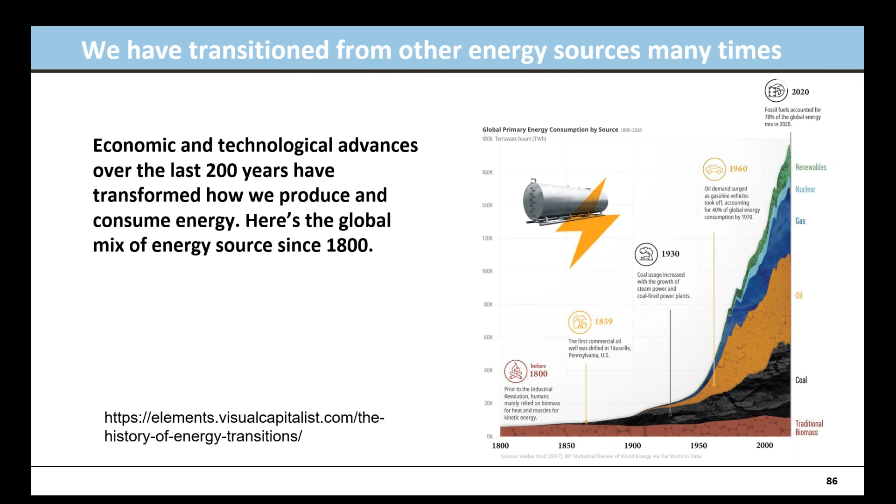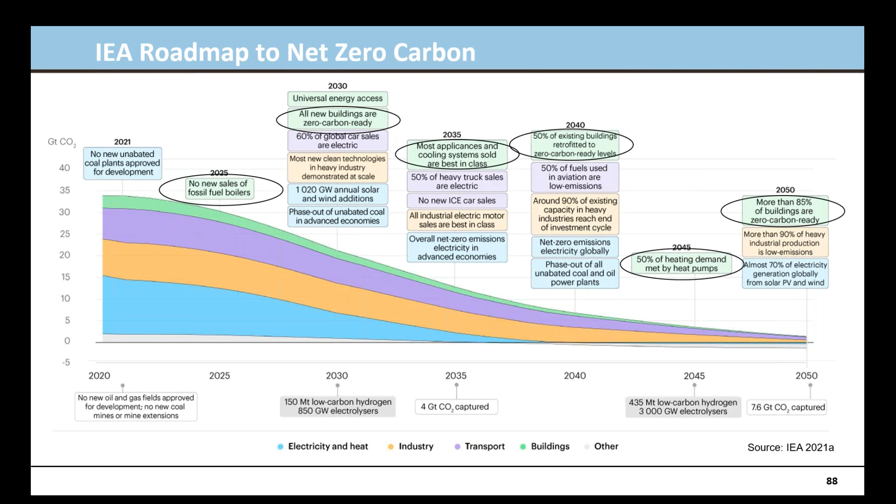The International Energy Agency has a roadmap, and I'm just going to point out a couple of the things. By 2025, no fossil fuel boilers. All new buildings by 2030 are zero carbon ready. Appliances are best in class by 2035. 50% are zero carbon ready by 2040. Heat pumps are meeting 50% of the demand, and 85% of the buildings are zero carbon ready by 2050.

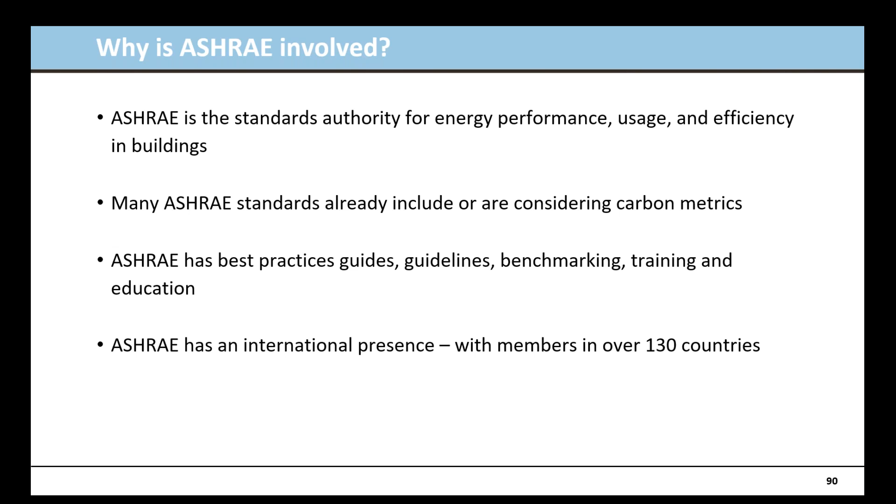So I want to talk a little bit - giving you the background - but let's talk a little bit about what ASHRAE is doing. ASHRAE is the standards authority globally, really, for a lot of things related to energy performance uses. Our standards are already thinking about carbon, and not all of them are really moving there, but I think that's going to change pretty radically in the next few years. The board has directed a number of the standards that is the way they're going. We already have guides on how to get to better buildings, best practices, guidelines, benchmarking, etc. And we have members in 130 countries, so we do have global reach.

So there was a position document that was published this past summer, and these are kind of key things. I've talked to many about them, but we'll go to the middle: by 2050, all new and existing assets must be net zero emissions across the whole life cycle. That's kind of a key part of that.

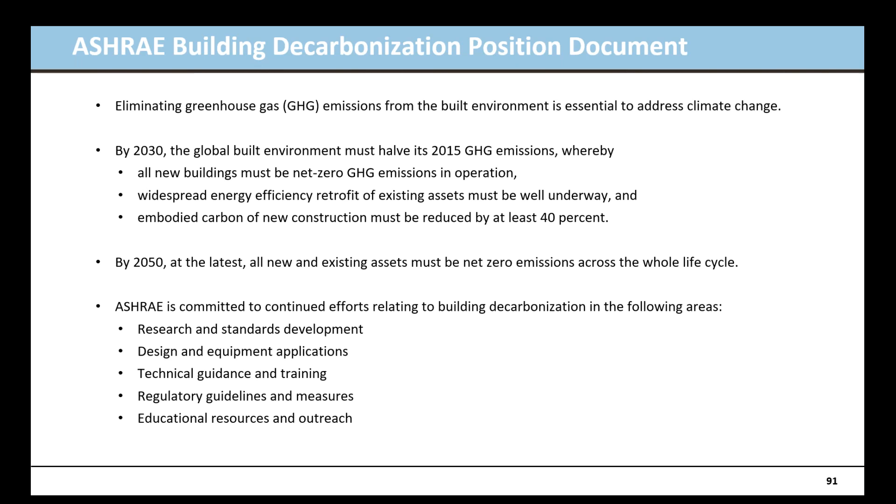So ASHRAE is putting a stake in the ground to say where they're going, and at the same time, committing to making decarbonization a focus in our research, our standards, design and equipment, technical guidance, any guidelines and measures, and educational resources. We talked about the carbon reduction principles - they're pretty much the same we mentioned earlier.

The decarbonization strategies - we can decarbonize any building. It's not dependent on age or anything else, we can deal with that. LCA is a critical part of that. New buildings are probably going to be easier for us, we can do that quicker. Retrofitting the large number of buildings - I think building performance standards are going to be the key for that.

The best practices can significantly impact the emissions, and so how we use our buildings, how we operate them is really key. And probably most important is that we can't really sacrifice the health and resilience of our indoor environment. We're not building buildings to be decarbonized. We are creating them as spaces for various purposes.

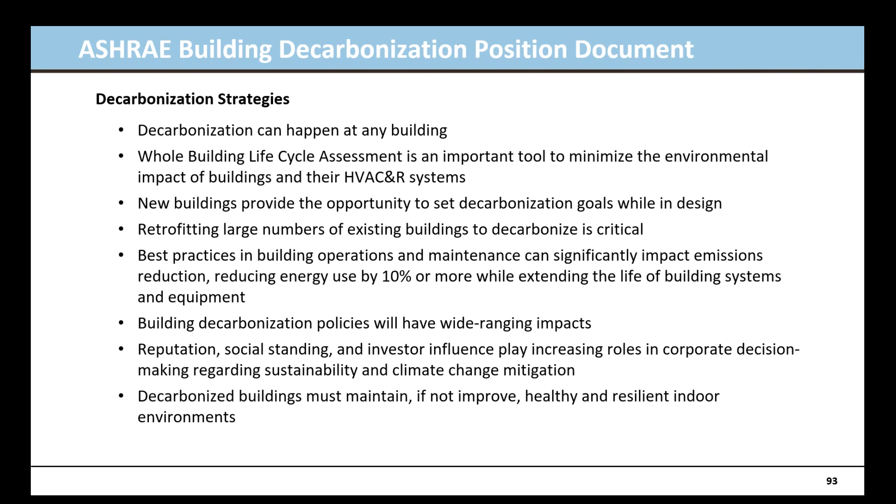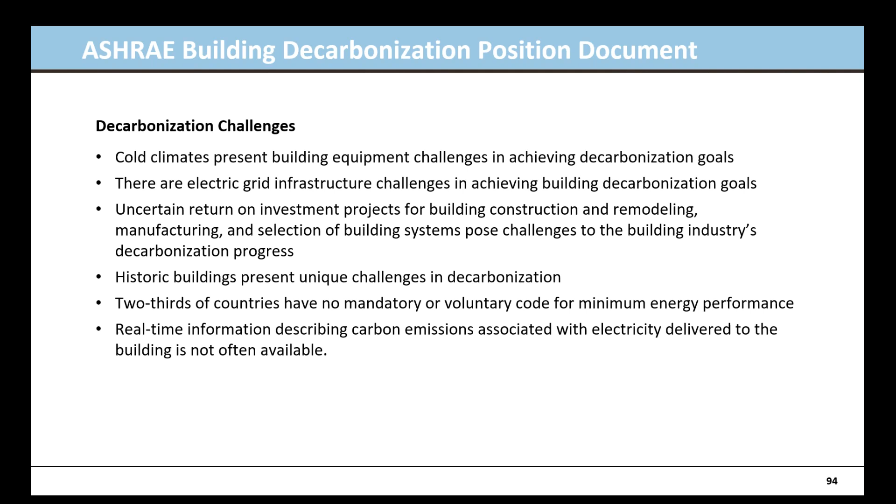So the challenges, we've already talked about this: cold climates, electric grid, return on investment being a challenge. Most people who own buildings, that's not their main business, so they're looking for higher return on investment than they might from their business. Historic buildings, no mandatory energy performance standards globally, and electricity and understanding how its carbon is, which is kind of key for that.

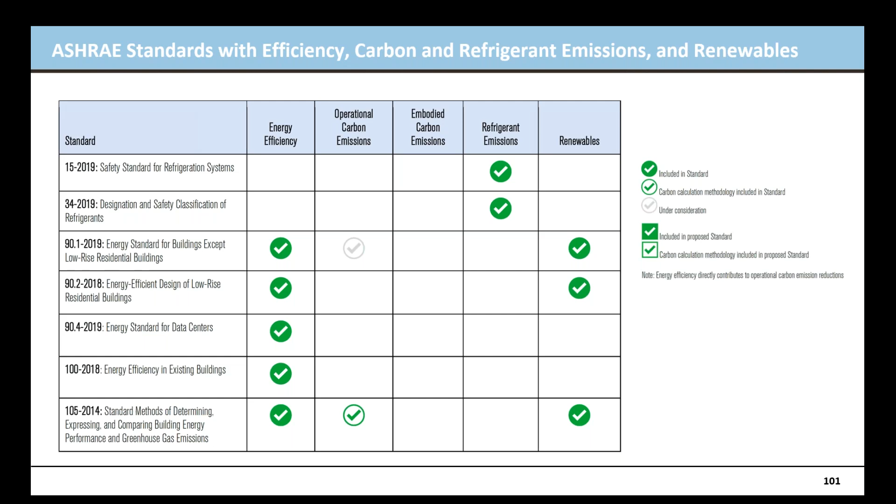If you look at the ASHRAE standards, traditionally we focused on energy efficiency, and are beginning to look at some of the carbon. We haven't really been looking at embodied carbon very much. Some of our standards are just around efficient emissions related to refrigerants, and of course renewables, so we don't have standards that are really pushing that. Now there's a new standard under development, 240p, which is looking at greenhouse gases and carbon emissions, intended to pull all of that together to be the baseline standard that can then be referenced by all our other standards.

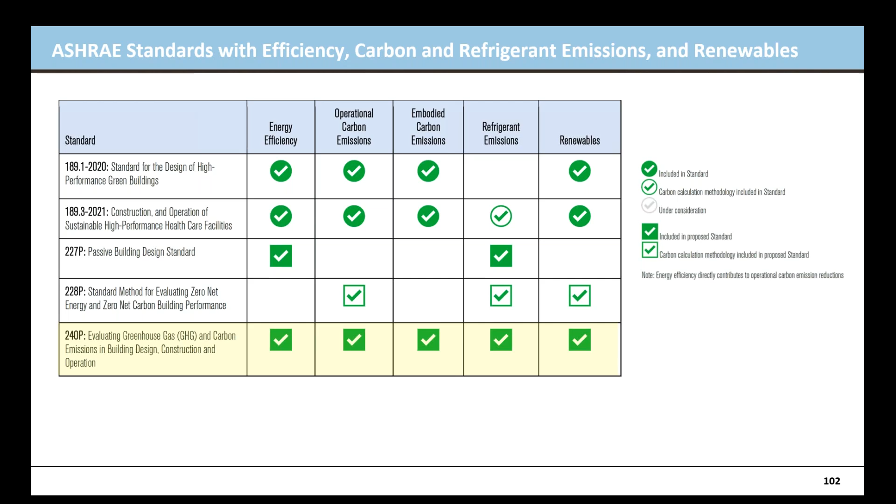The task force for building decarbonization - there was an initial one started in 2021. It got a lot of work done in publishing information, collecting information, and the new one which started this past July is much more trying to push that out into technology. Really trying to take the resources that have been developed and move that forward. By the end of June 2023, they are to provide a comprehensive plan for how this gets put into all of ASHRAE's structure - the technical committees, the standards, etc. - and coordinate that activity instead of a standalone task force, which is where it's been before.

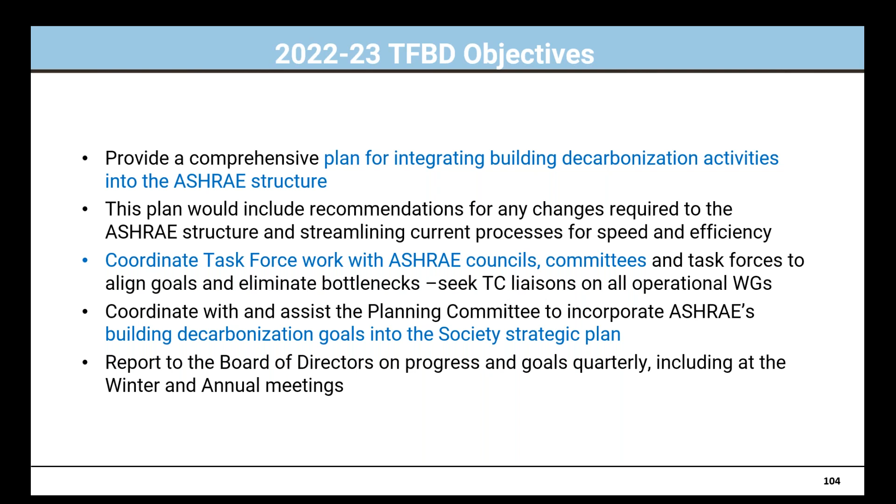The society's strategic plan was actually delayed by a couple of years, partly to work with the planning committee to make sure that these goals got in the strategic plan, because that plan's only updated about every 5 years. So that piece is there. But one of the key things this task force has been doing is working on a knowledge hub, pulling together the technical resources, standards, education, and training into a single place on ASHRAE's website - so all the things that we're already doing and things that are already underway.

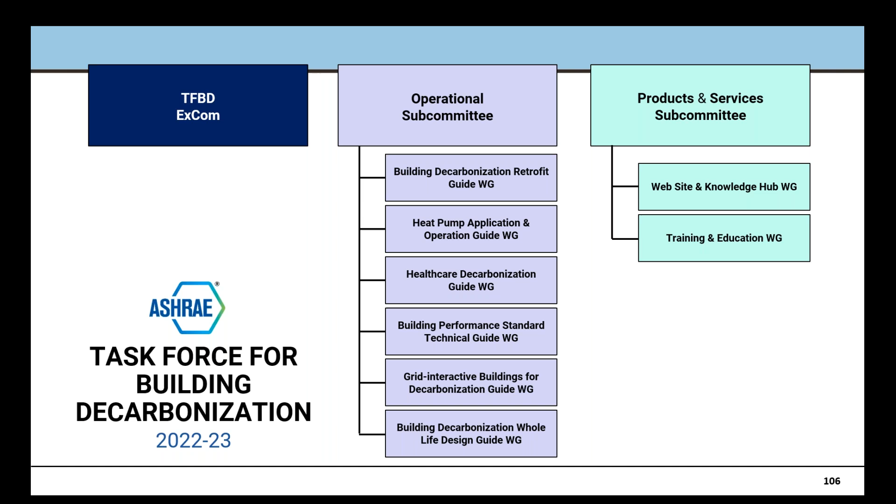The task force is really broken into two parts now: an operational subcommittee, which is developing 6 guides for decarbonization retrofit, heat pumps, healthcare, building performance, grid interactive buildings, and whole building life cycle analysis. The products and services committee is working on the other side of things.

In conclusion, buildings are responsible for, depending on the numbers - probably around 39% - but it's in the range of up to 40% of our carbon emissions globally related to buildings. Anytime we build a building, we're locking in emissions at that level, which can be high if we're not paying attention to it for decades to come. Buildings aren't a short-lived service.

When we talk about decarbonization, we're still talking about efficiency, but also cleaner sources and moving toward low carbon electricity. As we take our buildings to zero operating energy, that embodied part becomes more important. The good news is I think we have some time to work on that. We have a lot of work to do on the operational side first, so we can work on finding solutions to making sure our buildings are low embodied carbon.

The task force from ASHRAE is really a great resource for dealing with a lot of this activity. ASHRAE had earlier this month a building decarbonization conference, which brought people together from 30 countries to talk about activities there, with a lot of interesting papers related to that. The task force research and knowledge hub is really where that task force is going to be pushing that information together and pulling it as a resource for the membership.

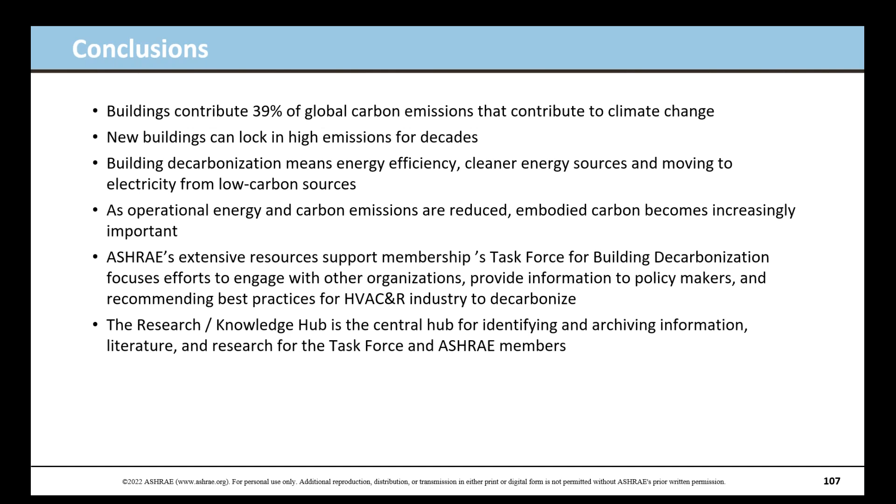So with that, I'll happily take any questions.

I think the first question, focused on this sort of locally here in the United States, is how do we best decarbonize existing structures?

What are the steps we need to take to improve the situation on existing building stock? I would think that's really where we need to focus, since it's 80% of the problem or more, because our new buildings tend to be a little more efficient. So I think we need to start with what can we do to make them more efficient? Are there retrofit opportunities we can take forward on that?

Is it a source issue that we can electrify? What level of renewables can we provide there? And can we use storage as a way to bridge when we don't have the renewable resource?

Now, there's been a discussion here about ROI on those things. The issue with ROI is always that you're focused purely on the economics and not the impact. I mean, if you took into account the return with respect to global warming, it would be a different calculation.